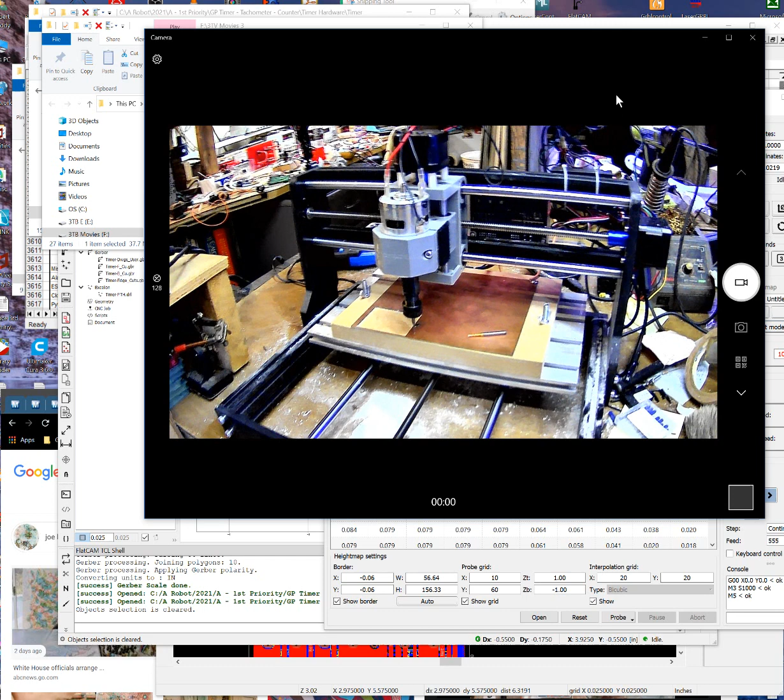Alright, I'm going to be making a double-sided circuit board with a 3018 Pro. There are a lot of variations of these machines out there, and this video will pretty much apply to all of them, like SainSmart makes one, etc. They call them sometimes something different, but any machine that basically looks like this is essentially a 3018, and if it uses Candle, which is the included software, that's what I'm going to be using for CNC milling.

I'm also going to be using Flatcam, which this is a pretty recent version, but it's actually about a year old. This is July of 2021, by the way. And my circuit board program is KiCad. So all this stuff is free software.

This won't be so much involved in KiCad because the board is pretty much already designed. I did just have to shrink it in length to fit on my little board here because it's only like a little over 6 inch by 6 inch. And you can see I've already actually routed one circuit board out of it, which is actually this board, and it's actually quite impressive what kind of resolution this thing has.

Now this is a little webcam I'm using here, so it's not the greatest, but it's the only way I can do this really kind of interactively without cutting it together, because I hate having to render videos that I stitch together. So I'm going to try to do this as a single continuous shot.

But yeah, this actually came out of this little area here, as you can see. And that's the little solder tab, which I'll explain later.

Now there's a couple of things that, and this is going to be a lengthy video, I can't help it, so there's not much I can do to kind of trim it down. I like filling in the details because the devil's in the details. But I'll explain my setup.

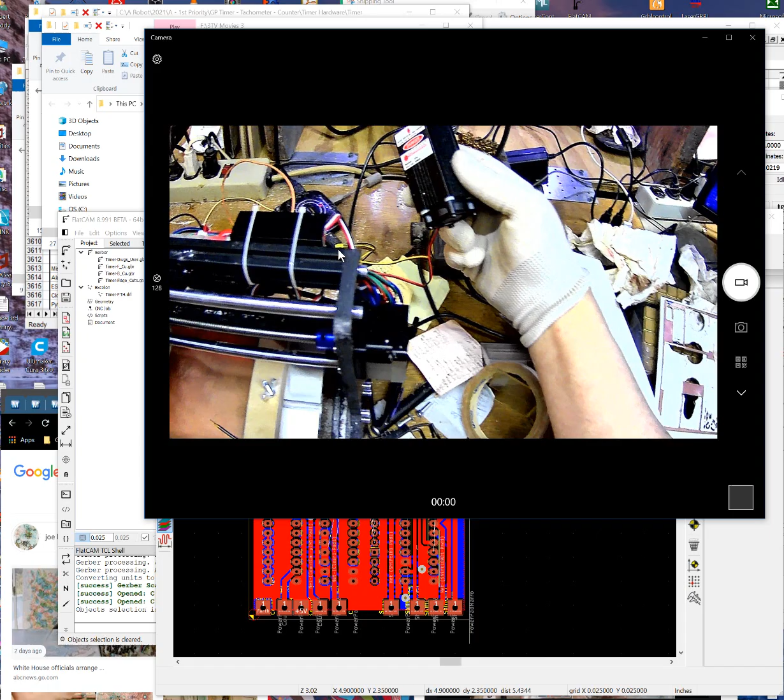Firstly, this is just a particle board that I bought from Home Depot. It's like 3/4 inch thick or something like that, just the cheapest stuff, nothing special about it. And you can see that I took a couple of bolts that actually came with this machine, and this machine came with a laser too for like $189 or something I bought off eBay. It's a 5-watt laser, and it works pretty well too, surprisingly.

You can see some laser experiments I did there, and this is white PVC, and it actually cut through it no problem. I would have thought white material would have reflected, but it would cut through white paper too. That laser is substantial. I was really shocked that it didn't reflect.

But this stuff right here, by the way, is expanded PVC, and I'll explain that in a second, what its role is. It's not going to play a role in this video, but boy, I highly advise you use this in the future, because I've used it in the past.

I'm not using it here because I'm about to take this jig, because this table is like a 7 inch by 12 inch table, and you can actually use 100% of it for routing, which is really surprising because usually you don't get that on a lot of these machines. Usually you can't use the whole table footprint for machining, but here you can.

So yeah, I'm going to cut a piece of this that's 7 by 12, and instead of the bolt being like this, I'm going to actually counter bore a hole about halfway through this material so that I stick the bolt in like this, and it'll go through a hole in the table itself. So underneath it I'll put a washer and a nut, and that'll hold it really, really tight to that position.

Same with this - I used to be in the sign industry, that's why I know this stuff. But it's really good stuff, and I've used this for CNC work for years because you can just use it over and over again. And this tape is so good, and this is what's so awesome about it.

If you want to use it for other things, like I stuck a light inside my freezer while it was running, and this stuff sticks just fine to a frozen surface. It works in freezing conditions. Most tape doesn't - most tape craps out on you below freezing. But that was well below freezing, like 20 below in there, and it still works just fine, and that light's still mounted in there to this day. It's really excellent stuff.

It's good for not just this, but a lot of stuff. And you can see it was used here - it's very strong, but you can still remove it. This is tacked down with 4 stripes of this going from left to right across here. There's 4 of them, and that's more than enough to hold this in place. I don't have any mechanical fasteners at all.

By the way, too, when I make up this platform here bigger and countersink it, you only need 2 fasteners, if you follow what I'm talking about. If you didn't trust the bolts alone, you could use a couple of strips of this under it and it would be fine, but there's really no need for it. The bolts alone will hold it, and you only need 2 of them, so you don't need to go stick 4 of them.

That does no good whatsoever. I mean, I don't advise you waste it, and I don't advise you put any more holes in this machine tabletop than necessary, in case you want to use it for something else.

Because you can buy what they call T-slot bolts for this, if you wanted to machine other things like do 3D sculpting or something, and you may want to get a 3D T-slot bolt set. You can probably find one on Amazon for this, and they're the proper thing to use. I've got one for some of my other CNC equipment, like that's a Sherline type mill right over there.

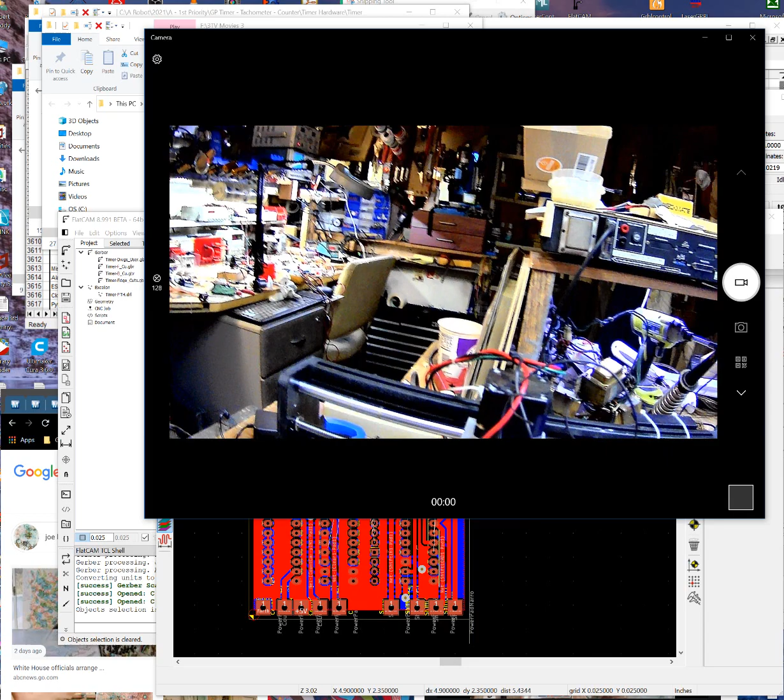Anyway, I have some - it's got a T-slot table on it just like this. My K2 does too. So I mean, you can use the right size bolts from Home Depot, but some of those sets are actually a much better choice quite often. It's up to you, it just depends on your budget.

You can take like an oversized bolt if you want, and if you got a bench grinder, you can actually grind it flat on 2 sides and grind it just the right size so it'll actually fit in there like a T-slot. That's another option - I've tried, I've done that before.

But like I said, you can see how I have this set up. My first set was single-sided boards, and that's what I use this for. It just had some of this tape at the bare corners, all 4 corners, and nothing in the middle.

That was a big mistake, especially with all these damn holes I have in it. I have these holes because my K2 had a vacuum hold-down table that I built, which used to hold my circuit boards down, hooked to a vacuum cleaner. It worked well, but anyway, it gets in the way here.

I would have been better off putting tape all over it. That's why I had to put some pieces here, because I used the crap out of it. I don't like wasting copper clad—I've got a ton of it, but I don't like wasting things. That's why I like doing things in big panels.

If you're interested, I lubricate my bearings with 3-in-1 oil. Some people say it's not a good idea, but it's worked for me on my K2 for years. You just basically rub some over your slides and your lead screw, top and bottom, and truck the table back and forth and the head back and forth to fully lubricate it. Put as much as you can, and do it every now and then. It doesn't hurt to wipe some of the debris off with a rag every now and then.

At any rate, this board I did out of this—what I did, again to save you the suspense, was the very first thing I did was really do a surface map on it, a height map.

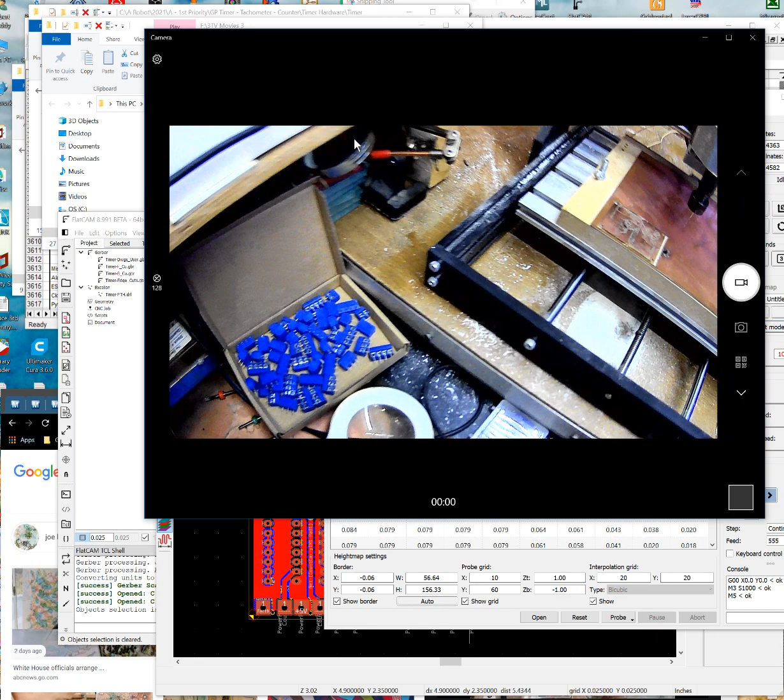Then I went in and drilled 2 reference holes. That's all you need, is 2 reference holes. And I used a... where'd that bit go? Damn it. Anyway, I used like a 42 mil drill bit.

I had a bunch of these I bought a long time ago from like Drill Bit City or someplace. I don't know if they're still around, but they had good prices on things like that.

Found them on, I don't know, Yahoo or someplace. But at any rate, you just need like 2 holes in it for reference, right?

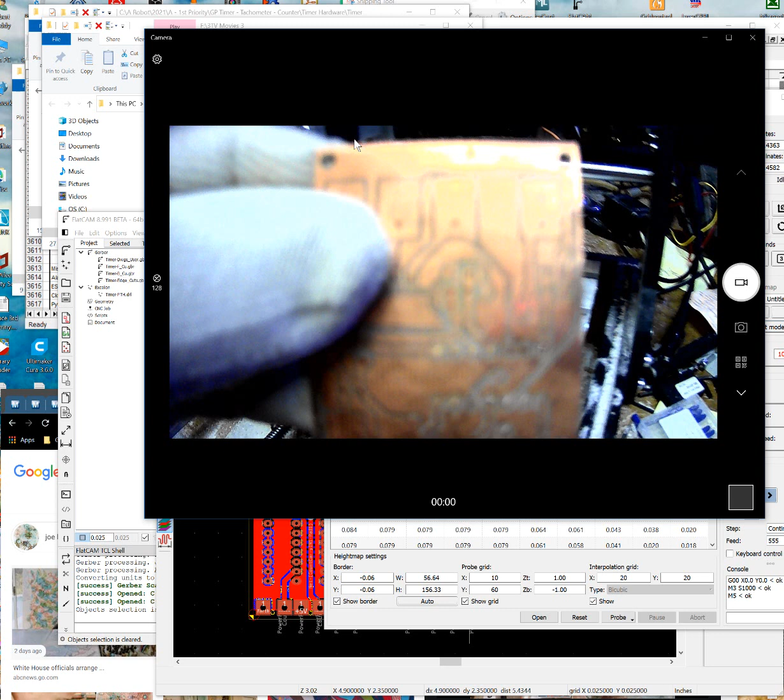And that hole right there is one of them. Then on the exact same place on the other side is one too. So basically, if you have a hole like that—since I got it on the left and right side—what you got to do is mirror your bottom layer left and right, so you flip it like this. As long as you do that, those holes are going to be in the exact same spot if they're on the geometry in the exact same place.

Now, if you wanted to do it up and down, which is what we're going to do with this board, you would want to flip it over that way instead. But you'll see what I'm talking about. It just depends on where you want to put your alignment holes. They don't have to be in the exact center—you can see that these holes are not in the exact center. They just have to be the same distance from, say, the top edge.

If they're both the same distance from the top edge, it'll flip and be in exactly the right place. And once you're done routing your board, the first thing you do is drill those 2 holes, and then you do the route of the pattern with your V-score routers.

For this, I actually used this 45-degree tip right here. But on the board we're about to do, I'll use this 3-sided triangular cutter, what they call it.

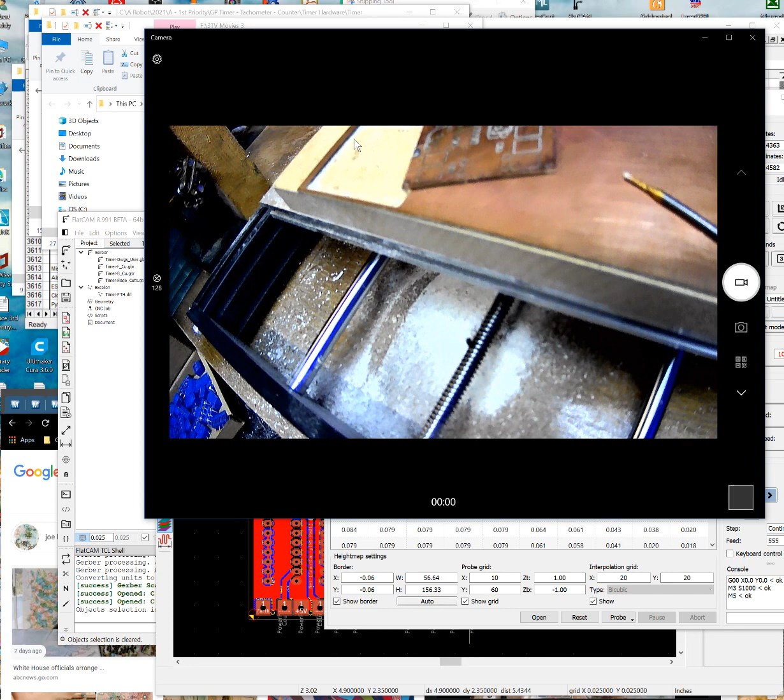Don't use those cheaper ones that are cut in half, because they break all the time. I've got a ton of them, but they break constantly. Let me see if any of them are unsheathed... yeah, here we go. These suckers right here, they really suck. You see how they're cut in half? They're not triangular, the bit is, but it's like somebody took a grinder and literally cut the thing in half. So you get kind of a conical point on one side, but it's just flat on the back side, a single flat going across here.

I wish this thing zoomed in better, but it's a webcam. Yeah, these suck, they break all the time, the tips break. But so far, these little triangular tips have worked great.

But again, for this circuit board that I'm going to do, I'm probably going to use like a 30-degree tip, because the resolution on it is going to be... I'm going to be really surprised if I can pull this board off. I'm not sure, I've never tried it before, because this is only the first double-sided board I've actually routed on a machine like this.

I've never actually done this before. I've created tons of single-sided boards. I've done lots of double-sided boards using an etching process back in the mid-90s, making literally thousands of boards that way, but not double-sided on a router like this, though plenty of double-sided ones using etching.

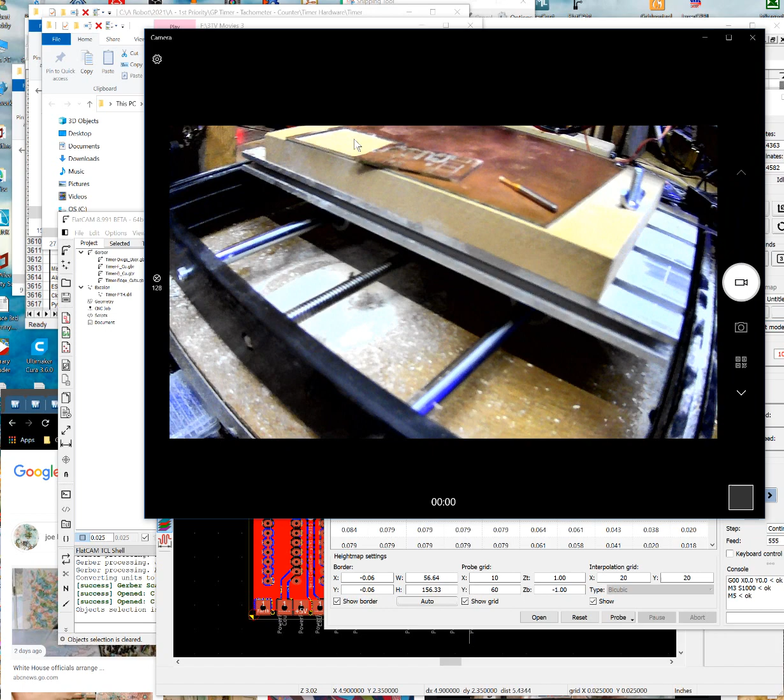Use the right drill bit size, and grab yourself a couple of thumbtacks. So you've got your tape on the bottom of it, right? So if the tape would be on this side, you take those little holes, stick your thumbtacks in, and you want them tight but still able to slide in. You stick them all the way in, and then unpeel the backing off your tape.

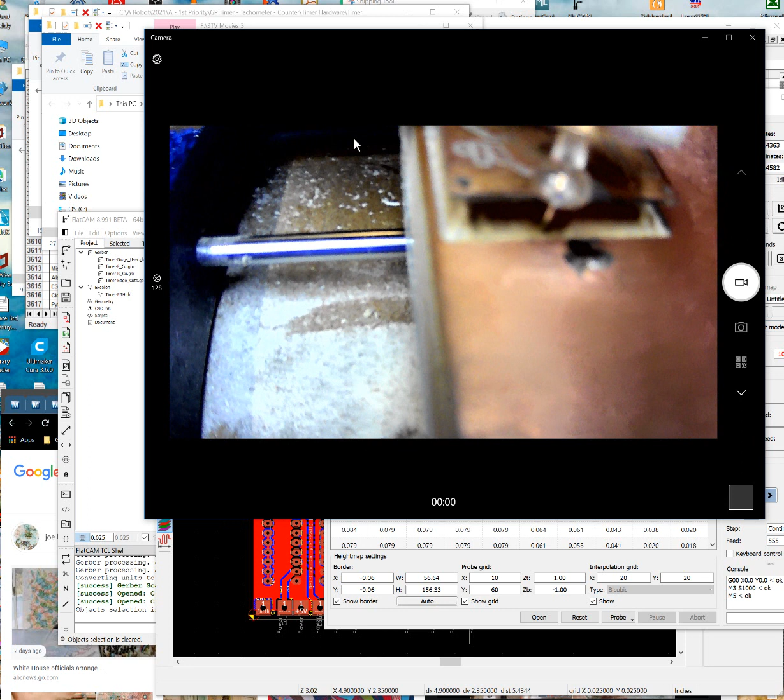Then you go in and stick it, looking for those alignment holes. And voila, once you found them, you press it down, using these tacks to make sure it's in place. Press the tacks down, press the board down, flatten the board so the tape sticks, and then remove the tacks. The tape holds it. I don't have tape on it here, but the tape will hold it exactly where it needs to be.

Now, before you do that, though, you see this little solder joint here? Solder yourself a little wire before you go through that process, and you probably should put it somewhere different than I did here, like over here or over here, where it's not going to be in the way of a future board you may want to route, because that stuff's hard to remove, and you don't want your router going through it. You can try with solder wick or whatever, but still, if you don't have that handy, my advice is just put it out of the way.

But you do that because you'll have to height map it again once you flip it over. You'll have to run a whole height map on it so that you get everything level to the new board, because this is going to have a different height, so you're going to have to rerun it.

And there's a couple of tricks to doing this, and one is that, unlike the mistake I made with this particular board, don't make the corner your zero reference on the exact corner of the board. Otherwise, chances are your height map is going to be really hard to make, because it's going to want to walk off the edges of this thing. Inset it by about 1 millimeter. It's 50 mil, about 50 mil both directions. That's what I use. That's enough to keep it confined, but don't make your pattern go to the edges.

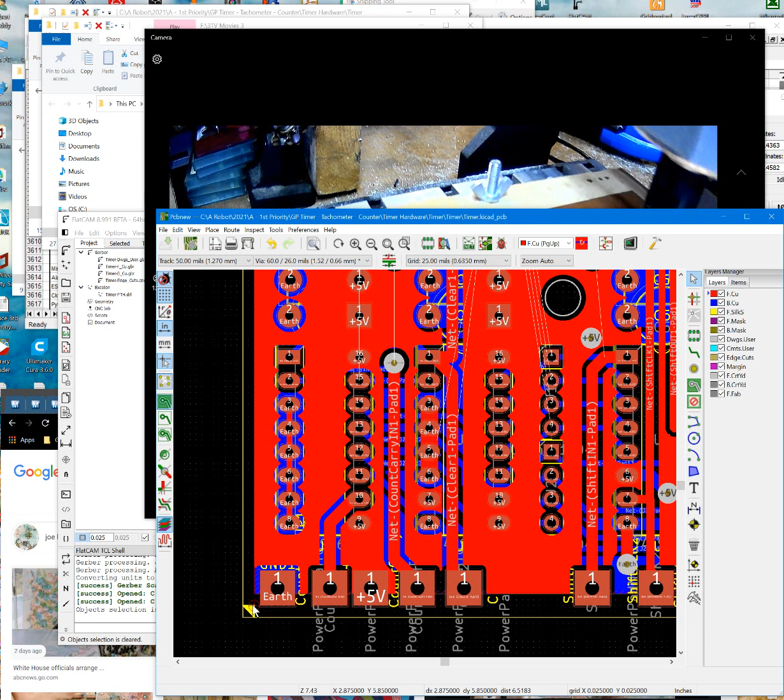But basically, here is where I'm putting my reference anchor. So I made this little silk screen triangle here so that I can mount it to the corner of that. So you see, that's where my reference is, on the corner of that little silk screen deal. That should be your home. That way it'll height map okay, and you won't walk off into the gutter. But definitely don't forget to solder that wire, otherwise your height map is not going to work out so well if you don't have that little solder joint there.

Now, a little word about how I set my height mapping up, which I haven't seen anybody else do on the internet. On every board, on the top surface, you solder a wire there, right? You only need to solder one on the top surface of your blank board. Okay, and that goes into the A pin. You can see this on the internet; there's plenty of articles about how to set this up, including on SainSmart. But it goes into the A pin there, but then I have, damn this thing.

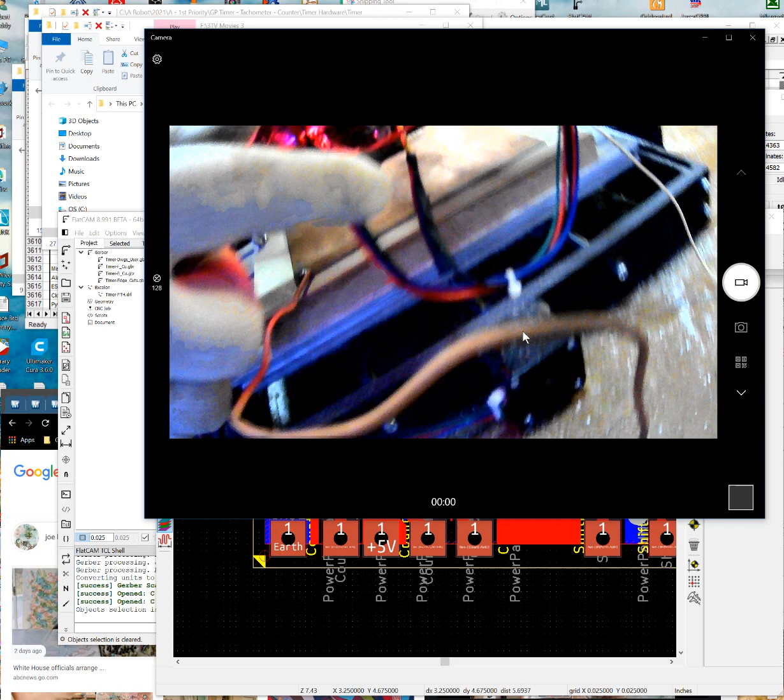Anyway, I have this going into a European barrier block here that I cut in half, cut out to be a 4x4. Then I have an alligator clip coming out of that, going over to this wire here. Now the other wire coming out of that is this black wire. It is hard operating a camera like this, because this is backwards and everything. But at any rate, that's that black wire, and I have it going over here, guys.

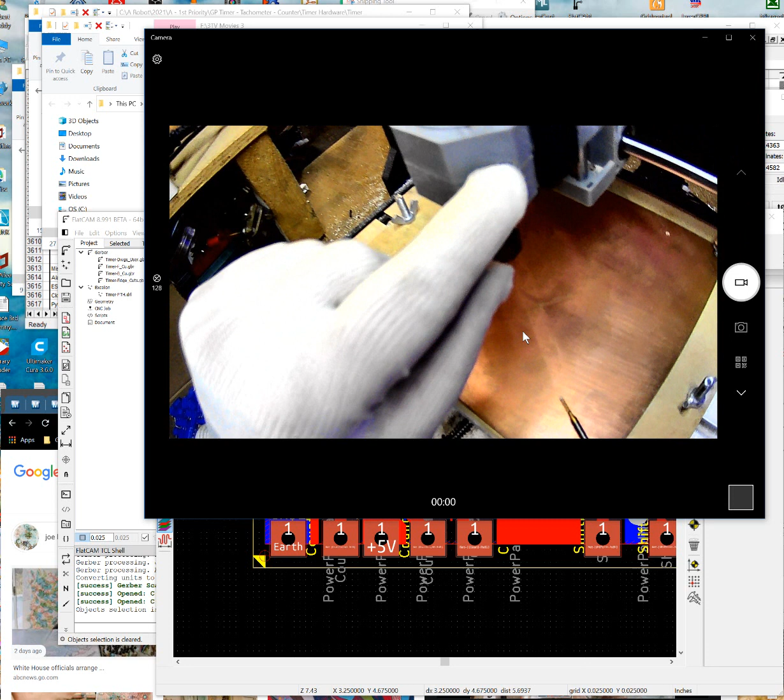Almost everybody I've seen uses alligator clips, and they clip it to the spindle. You don't need to do that. I have a wire here soldered to a piece of nickel, and anything conductive will work, and that's just pressed down in there, and then I just tighten this screw down on it. So this isn't actually soldered to the motor, it's just soldered to a piece of metal, any metal that'll take solder, copper, whatever. As long as it's flat, you don't want to interfere too much with your motor being gripped.

But anyway, once you got it in there, just tighten it up, and Bob's your uncle. You can leave it like that. You don't have to disconnect it. And believe it or not, this body is always in contact with the spindle, always. And you can always test it if you just freshly set it up. I tested it. I'll take one of the wrenches that came with it and just do that. Here, I'll show you.

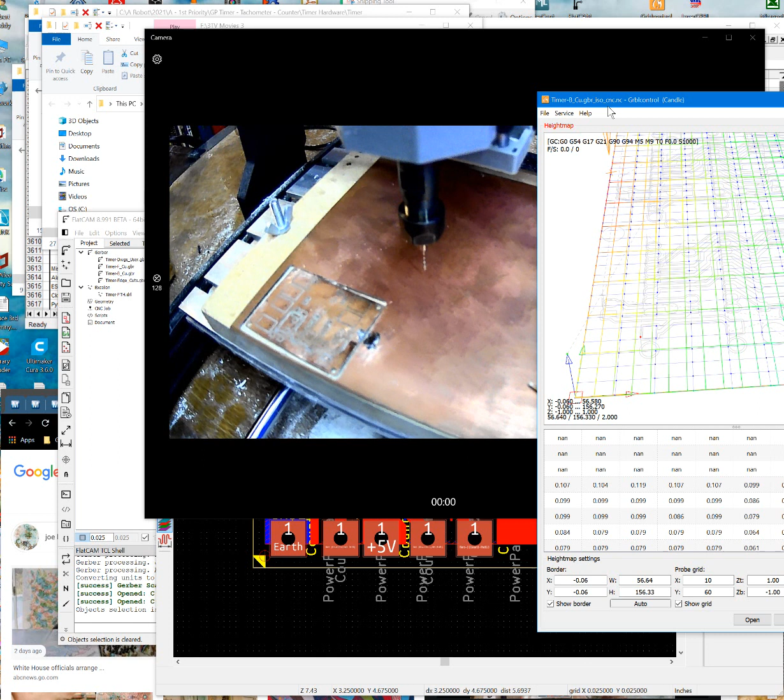I figured it would act like a limit stop, but it doesn't. It's actually a totally separate circuit, so you can leave that connected all the time. It does not interfere with the operation of the machine. So there's no reason to keep connecting and disconnecting it all the time, because you will break bits like crazy by either forgetting to disconnect it or...

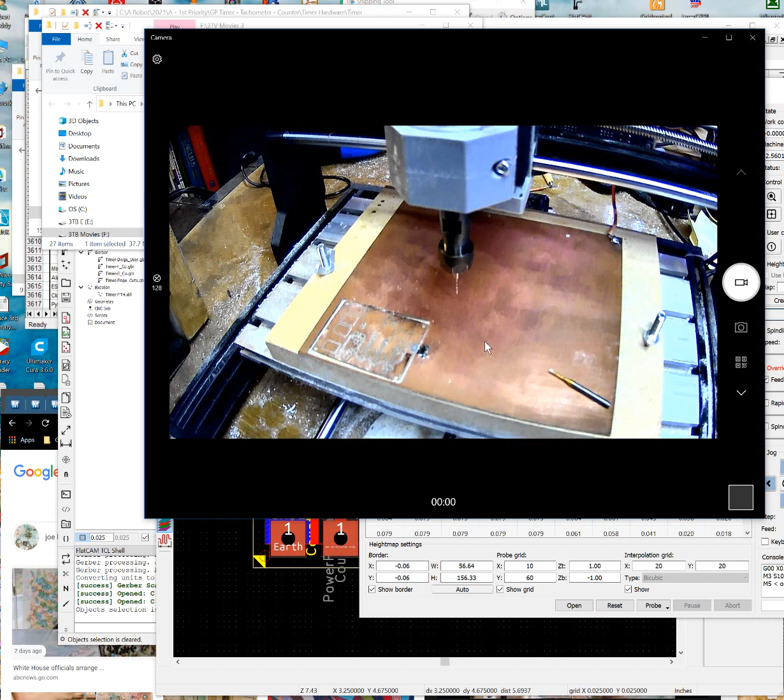Anyway, the fact of the matter is that it works, and you can just leave it like that, because like I said, you'll either break tips, or more often than not, you'll end up almost starting a fire by forgetting to take the damn clip off of that thing. So it's just better not to do it that way. Just leave it permanently connected. There's no need to do it.

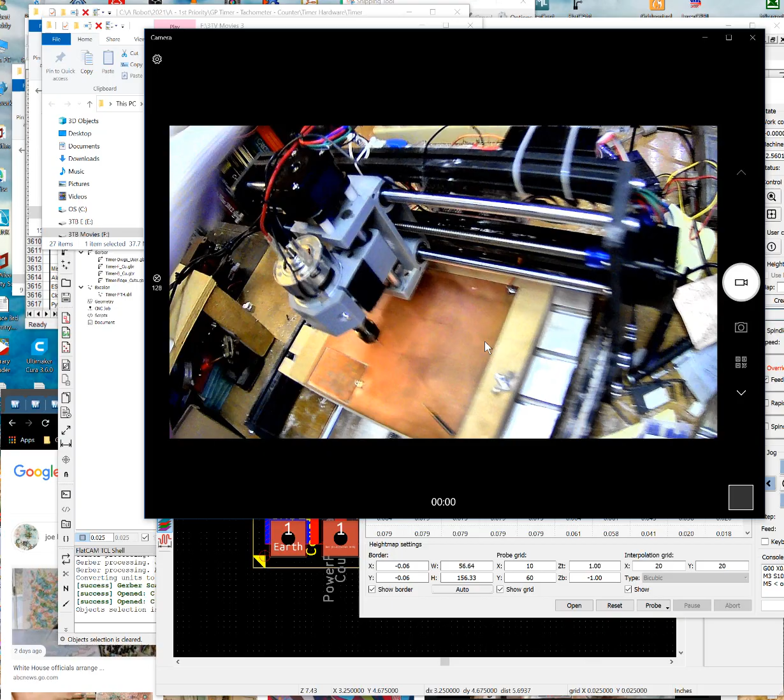I wish I could make these wires better here. On my ShopBot, I've got a band that's in an arc of flexible plastic, and the umbilicals, all the wires and everything, I run along that. That's what I'd like to see, something like that going here, but I haven't got around to looking for that yet. But anyway, you need to wire tie your wires to it.

And a note too, when running these machines, I tend to run them pretty slow. Again, you can certainly experiment with your own equipment to get it up as fast as possible, but this is not a very high-speed spindle. These circuit board drills and circuit board tools are typically made to operate between 10 and 20,000 RPM. That's what they are actually used at in industry.

They're really high speed. This is running at, I don't know, I haven't put a tachometer on it yet, but maybe 1,000 RPM or so. You can tell just by how it sounds that it's not very high power. But if you actually look into these motors, this is basically the same motor they get out of one of those battery powered 18-volt routers, and of course they're powering this off at 12 volts.

But you could literally, if you didn't care if the machine controlled the motor, just wire this up to an external variable power supply. It better be a lot of amps, because these motors tend to draw a lot of current. Have something that'll go up to maybe 15 to 18 volts, but I don't think I'd run it that high, because these motors, being from power tools, the bearings and so forth in them aren't really built to run for extended periods of time, like an hour on end at a high speed.

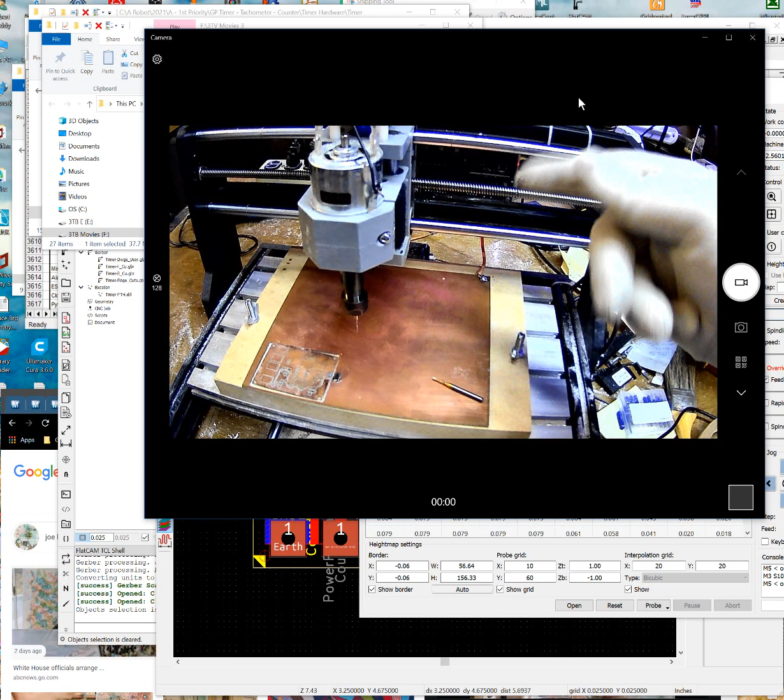So that's one of the reasons they have it tuned down. The other reason is just because they're cheap and they don't want to have to provide a bigger power supply, because higher voltage would mean more current and a much bigger power supply. This really should have at least 5 or 6 amps. This, I think, is only maybe a 2 or 3 amp power supply. I forgot. But at any rate, it should have at least 5 or 6 amps, preferably 8 or 10 available for stall situations, if you're going to run it at a higher voltage.

But it could be done, like if you're going to drill holes and wanted to do it really fast. If this thing went at high speed, it could drill all these holes within a few minutes. You could run this at a much higher speed for a few minutes without it getting too carried away, although I still don't think I'd run it up to the full speed. A motor like this can typically go up to about 5,000 RPM, and you'd be way better off with that with some of these drills. But still, I've had okay luck at this speed.

Another thing you could do is build a FET-based amplifier, because this is just PWM, so you could have that driving a FET amplifier. Then your separate power supply would be modulated by that, which goes to the motor. Then you still have both speed control and on and off control, like you do currently. So that's another way of doing it if you wanted to dink with it. But you should probably just buy a higher speed spindle, because they have them for like $60.

Anyway, that's enough said about that. But this is the basic process of how you go about making a double-sided board here.

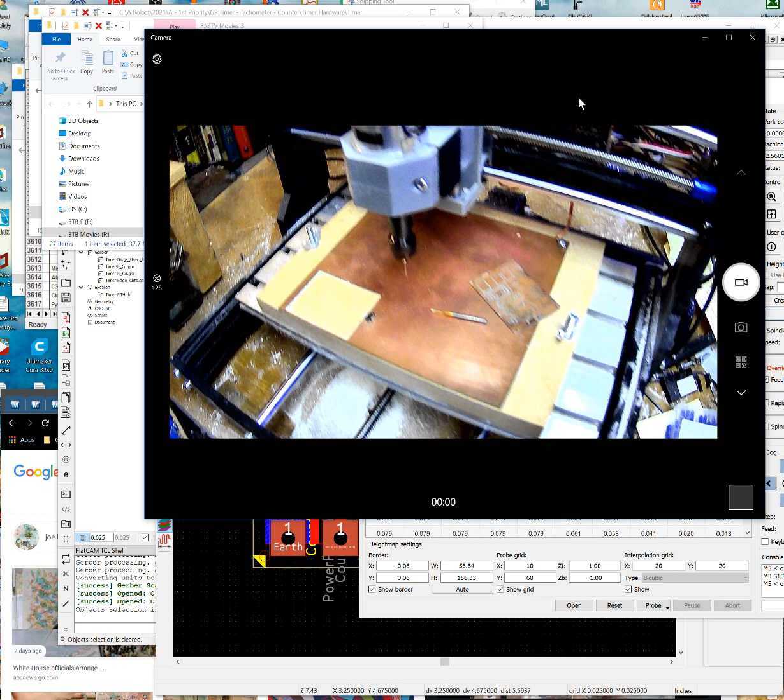So I'll see if I can think of anything else for a minute before we get started. And I guess I ought to say that I have made thousands of circuit boards myself. I've been doing this, like I said, ever since the early 90s. Back then I was using chemical etch with ferric chloride, and came up with a lot of contraptions doing that. I was actually in a small-scale business doing that for a little while.

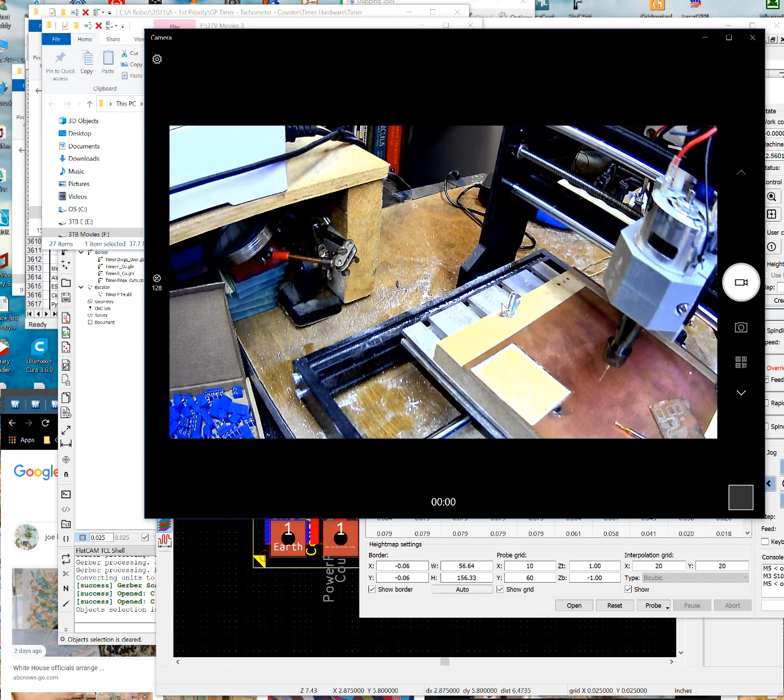That's what I'm saying. I've made lots of circuit boards using lots of different techniques, including the iron-on technique with the paper, which I actually have my own version of, which worked quite well, but it's not as elaborate as what people are doing these days. But I'm not quite sure if that technique really works with most laser printers anymore, because I don't know if the laser printers seem to put enough ink or something. Something seems to have changed, but I'm not sure if the toner is the same or whatever.

But still, doing it with CNC has certainly been a really great way to go. I've made some pretty large circuit boards doing that. Let me see if you can see this without unplugging the camera. I don't know if you see that right there, but that's actually a digital sign, and those panels I made on my K2, and those are like 12-inch by 6 or 7-inch wide panels, and there are like 4 of them in there. So that's a great example.

Again, my K2 over there, which you can hardly see, it's buried because it's on the other side of that monitor over there behind those wire spools. But at any rate, that is a machine that'll do 12-inch by 12-inch circuit boards, and I had a vacuum hold down for it that I used to use, which is why these things had holes in them. Those are for vacuum hold down holes. You see, there's one of the actual full-size pieces I used to use for that machine.

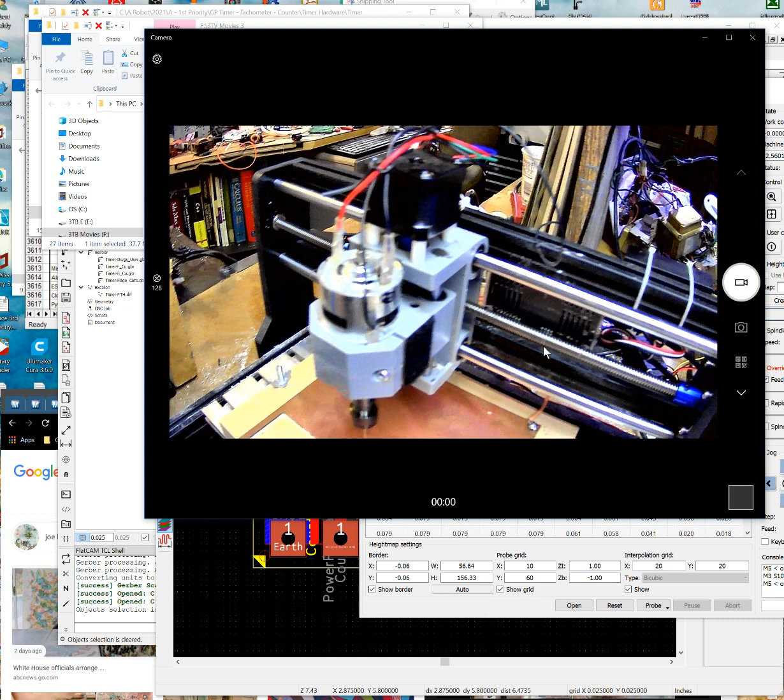But I don't use that anymore. I'm trying to use this for circuit boards because it's so much more precise because of that height mapping it can do. Because I couldn't make circuit boards like this on my K2. I could with traditional cylindrical routers perhaps, and if it was small like this, I could. But if it was large, I couldn't do it. But this will height map, and it's mostly a software thing. In theory, you can make the K2 do that, but I'd have to write my own software for it. So I'd rather not waste my time on that.

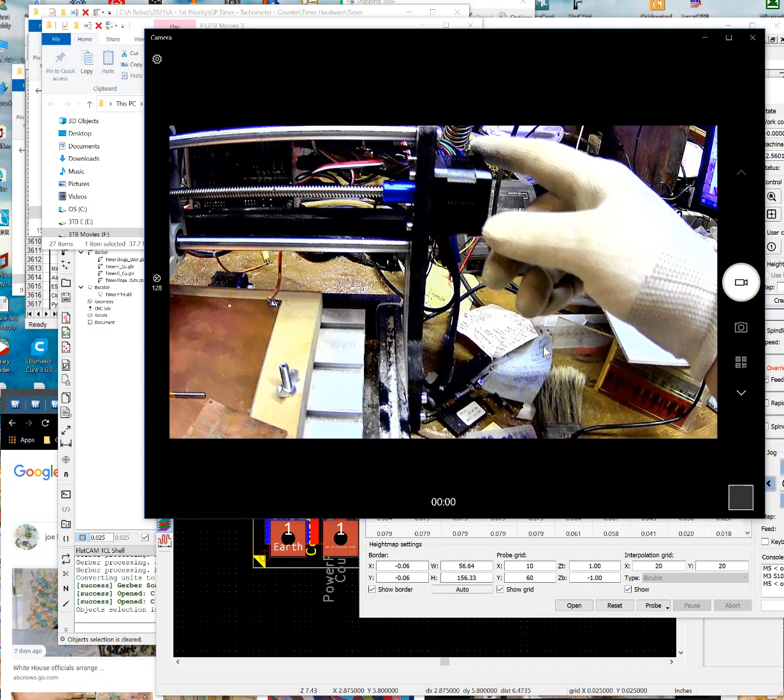So I'm just going to use my K2, which is a much more powerful machine than this, for more serious work like routing aluminum and stuff. It's powerful enough to do that. This, with these little 30-ounce or so stepper motors, I don't know if I'd have a lot of faith in that. In the spindle in particular. Like I said, it's stronger if you want to run it at a higher level, but it's still not built for high-speed, long-term operation. Even though you can get more oomph out of it than this, I guarantee you. I don't know that I'd want to route aluminum, but I have seen people do it, apparently with stock motors but an updated spindle.

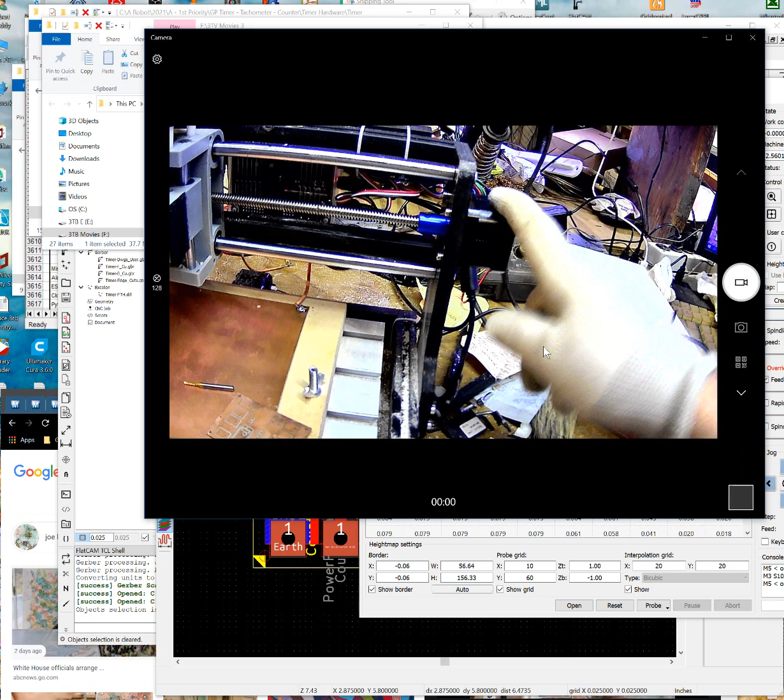But really, these motors are responsible for the feed force, and if you don't have a lot of force here, you could lose steps pretty easily. You'd be amazed how little force these things can actually apply. Being such small motors, it does make sense to have a more powerful series of steppers, but they're NEMA 17s. You could upgrade them, but I don't know that your controller would be able to power them or not because it's got built-in little stepper drivers. But at any rate, if there's anything more, we'll mention it as we go.

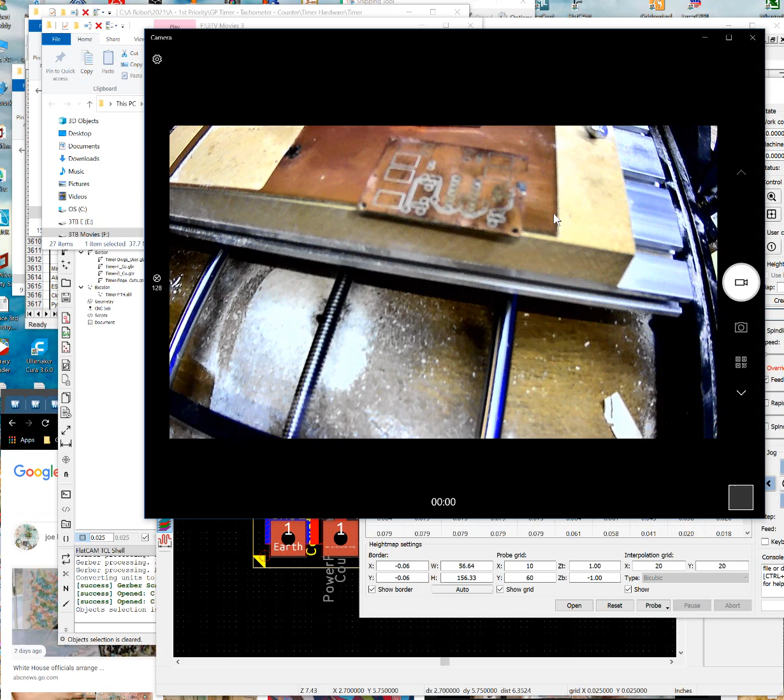Oh, and one more thing, if you're wondering why I'm not using the expanded PVC on this, and I'm just drilling directly into the backing, which I never do, it's because, like I said, I'm about ready to dismantle this thing. I'm not going to use it again, so I don't care if there's a bunch of holes in it, and I don't want to waste any more of that than necessary, and I don't have a good piece to fit this, so I don't want to butcher one of my other pieces just for this when I'm not going to use it anymore. So anyway.

If I were going to use it, I would put some of that hem tape on it, about four stripes across the back of it, and put it down into our baseboard here. Then I'd put tape on the back of this just like I did, and tape it to that, to the expanded PVC. So that's how you do it.

You can peel it off again because that tape is permanent technically, but it's still pliable, so you can still peel it off even if it's been a month or more. That's why I like that tape so much.

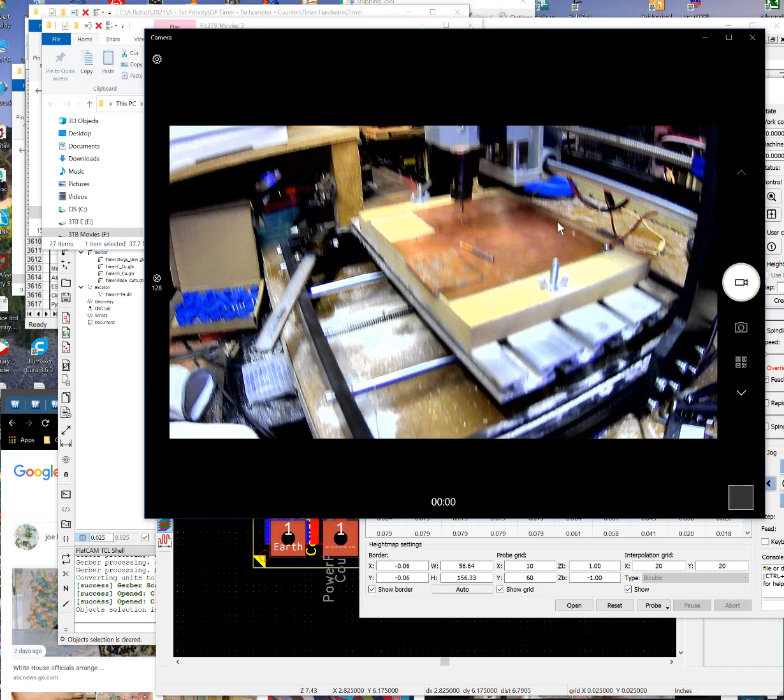Before we really get going here, I wanted to cover some of the stuff that you should probably have if you're going to do this kind of thing.

Have yourself a set of these, and of course you're going to want a set of router bits. Here's a set I bought again off Amazon for like $10 or so, which has a lot of different sizes. Typically I've been using the 1/16 inch router bit, 0.062 or so, but you can use any one you want. That's just been my preference.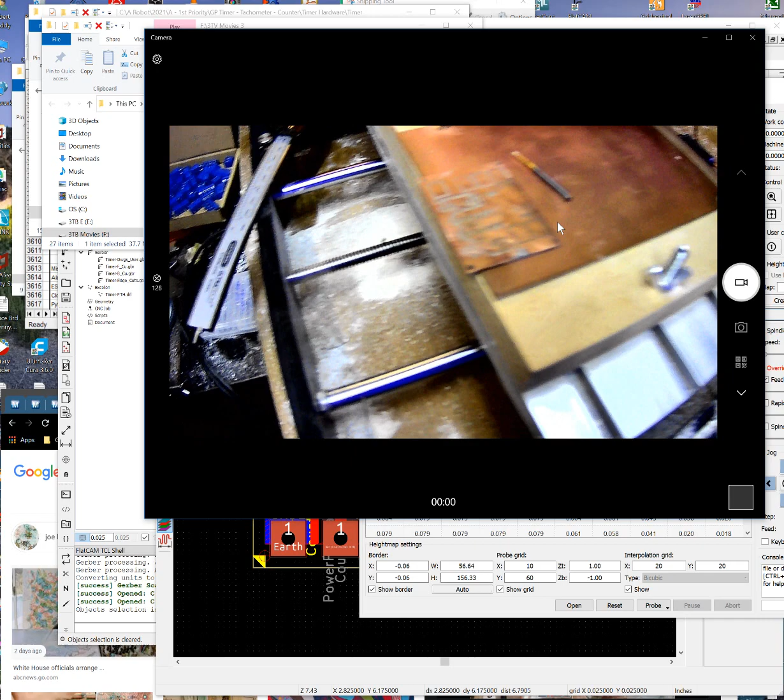Because it has a narrower kerf, so you get more use out of your board. I don't like to waste copper clad, I just don't. That's why I don't do it like other people do it.

They'll cut the board, the copper clad, to roughly the size, and then they only got one loaded up. But this way I can actually do several of them without having to change out the panel, so it works a lot more efficiently. You don't have to keep messing with your main board and backing and your waste board all the time.

You should have a good pair of calipers. This is inches and millimeter digital calipers. I bought this, I think, for 18 bucks from Amazon Warehouse, so I found a good deal on it. These are normally 30 bucks, so nice little calipers, they work really well.

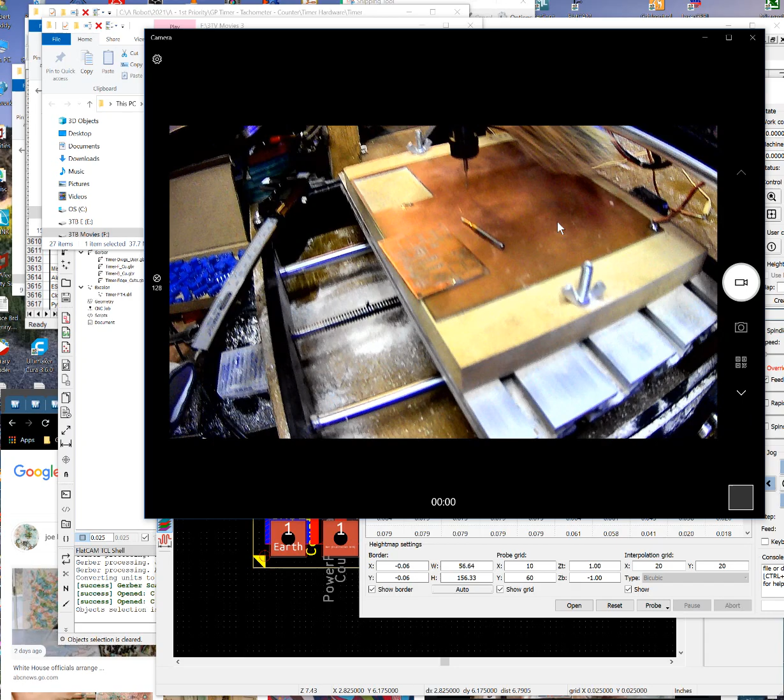You're definitely going to want a little paintbrush so you can dust it off as you go, because it doesn't matter if you get it close to the tip when it's turning, etc.

That works great. And then oftentimes I'll use a lighted magnifier glass like this, which has basically visible light and also UV, which is interesting. You can see what it's doing to the traces there. As it turns out, when you're routing with FR4 or whatnot, boy, that backing really shows up through the light really well, so you can see if your traces have got any garbage in them really easily.

I was really surprised how well this worked. That was quite a discovery there. I only just recently discovered that with this thing, but man, it fluoresces. The material I use fluoresces.

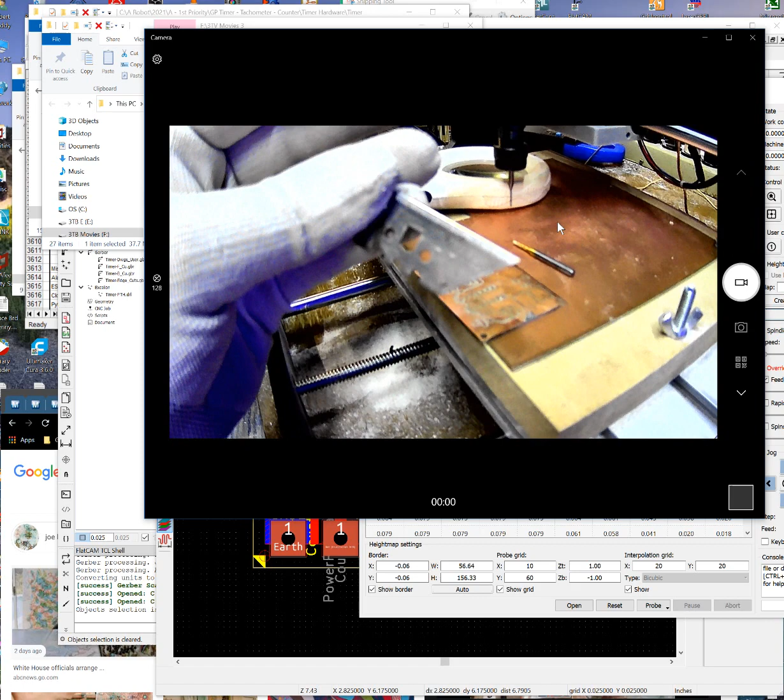So you can tell if you've got any little copper slivers or anything in there that you need to dig out. And you should have some dental picks, which I don't really have one lying around. You can use little razor blade tips like this, for utility knives. Those work really well to try to scrape stuff out of there underneath a magnifying glass.

It's a really good idea to have yourself one of those mag lamps, like I got over there, to look at these under too, especially when you're doing that, so you can do it hands-free, because that's usually a two-handed job. You don't want to turn it into a three-handed job like you would with this. Or have something that can hold the board independently while you scrape it, but you have to apply force. And of course, get yourself a good collection of drill bits wherever you can find them.

A lot of these I bought like 20 years ago at a place called Drill Bit City. They were a good price, but you can find some pretty good stuff off Amazon too.

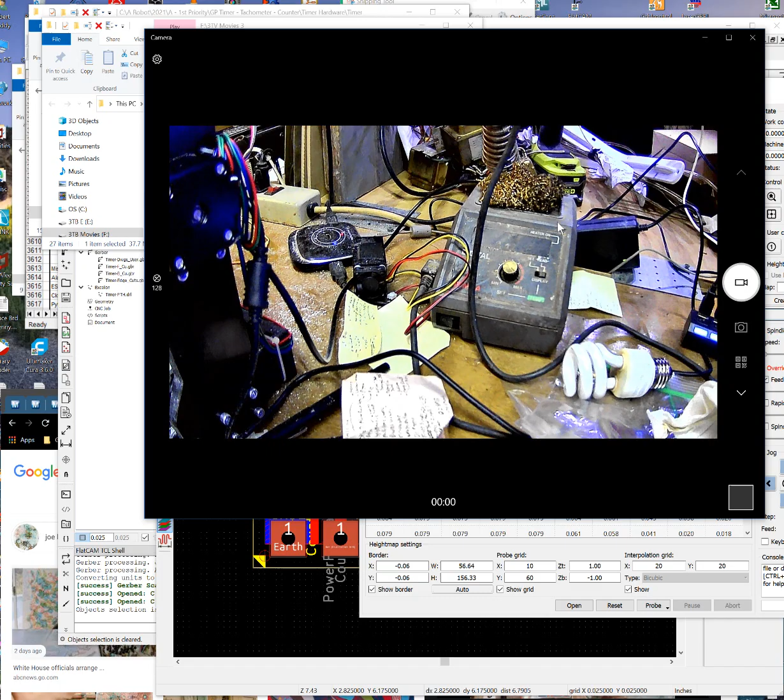I got myself one of these little things which work all right - little magnifier glasses - and definitely a soldering iron of some kind is a good idea to have, and certainly miscellaneous tools like screwdrivers and stuff. You want to have some basic tools like that. It doesn't have to be lighted, but it helps a lot.

Especially if you're trying to route it, because a lot of times I'll try to study the route, like when I'm doing V-score routing, as it goes. I'll brush the chips off with my little brush and try to make sure that it's actually scoring fully into the board, as opposed to just scratching the surface of the copper, which you run into sometimes.

That's at least a basic minimal tool set I'd advise you to have for doing this kind of stuff. And Scotch-Brite pads, like that green one lying over there, is a good idea.

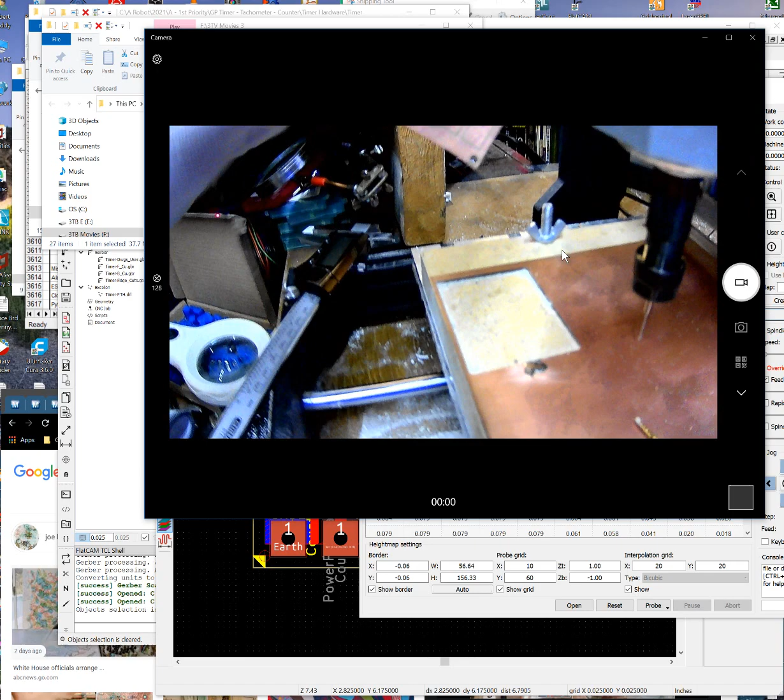But what I found is that the best way to actually clean a board - because you'll have to do that - that's the other thing I forgot to mention: when you're done with the first side of the board, the top side, and you're ready to flip it, you should clean off the top side before you put tape on it, because you want to make sure you remove any burrs.

The best way to do that is actually with a bastard file, just a flat file. As it turns out, this is actually one of the best ways I've ever found to clean circuit boards. If it's already routed, you just do it. You've got to be a little persistent, but it's actually better than Scotch-Brite or sandpaper. If you have a bastard file, you can make this nice and shiny, really, really good solderable surfaces.

By the way, if you're doing soldering - I don't know if you can see that, but that's actually exceptionally shiny with a very small amount of work. It's a really, really good way of cleaning not only the burrs off your board, but also getting all the smudges and fingerprints and anything else you may have on it off.

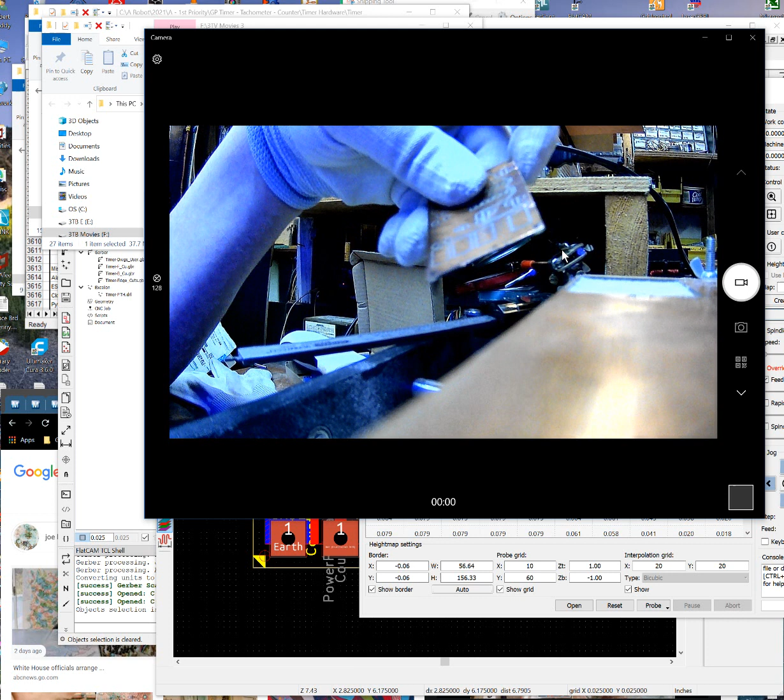When you're soldering these things, you might want to get some liquid flux. No-clean liquid solder flux is what you'd like to have - I'm sure you can get that off Amazon too. Just have a little syringe, like a needle syringe, you can apply it so you can get it right on the pads. Because these things will solder a hell of a lot better if you do that.

If you're worried about solder bridges and stuff - which I'm still really worried about with things like this and the board we're about to do, given the fact that I've got a lot of traces routed between a lot of the pins on the board we're about to do, not this one - I'm still really nervous about whether it'll actually be solderable because of all the bridges.

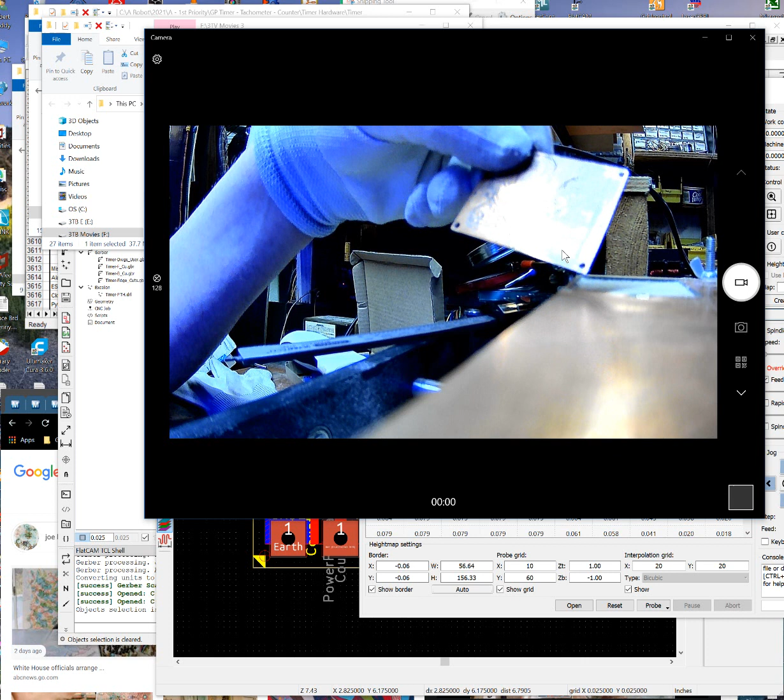But you can actually buy solder mask on Amazon. They have two varieties: one's kind of an iron-on stuff, and the other is this liquid stuff. And these German guys make a good video about how to do that.

I don't know if I have the video up yet still or not, but today I'm gonna... yeah, it's these guys, that's DIY Tech Brothers.

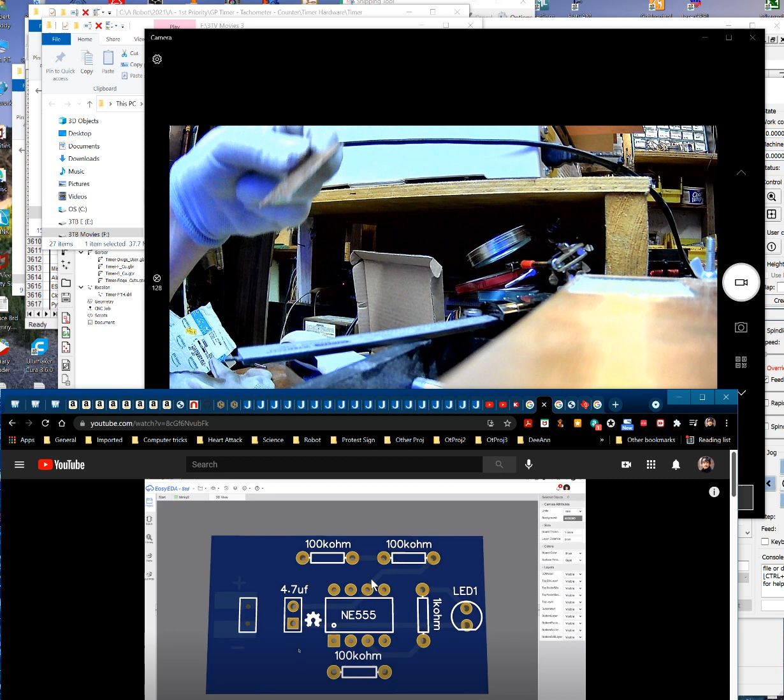They have some pretty good videos about going in and doing things like applying solder mask, and they have their own videos on double-sided boards, but they do it in a more traditional way, as opposed to the way I'm doing it. You might check their site out if you're interested in some of that solder mask.

But you can buy that off Amazon too, although the syringes don't come with a plunger on them, the ones on Amazon. I don't know how they get around that, but it's available there, though I've never tried it.

The last time I used solder mask, I used LPI, which was actually the professional grade stuff they actually used. You'd silk screen it on, then do a photo exposure pass, which you could do in sunlight or whatever. It's doable, then you use a chemical to remove it, and that isolates your pads, and it works really well.

You got to be careful if you ever find any of that stuff, because it may look removed but not actually be removed, and then you can't solder to your pads. So you got to make sure it's not overexposed or anything.

But at any rate, I digress. Let's get back into the video because we got to get this FlatCAM stuff done. I've already loaded up the layers on it, as you can see here, but I could just start a new project for you.

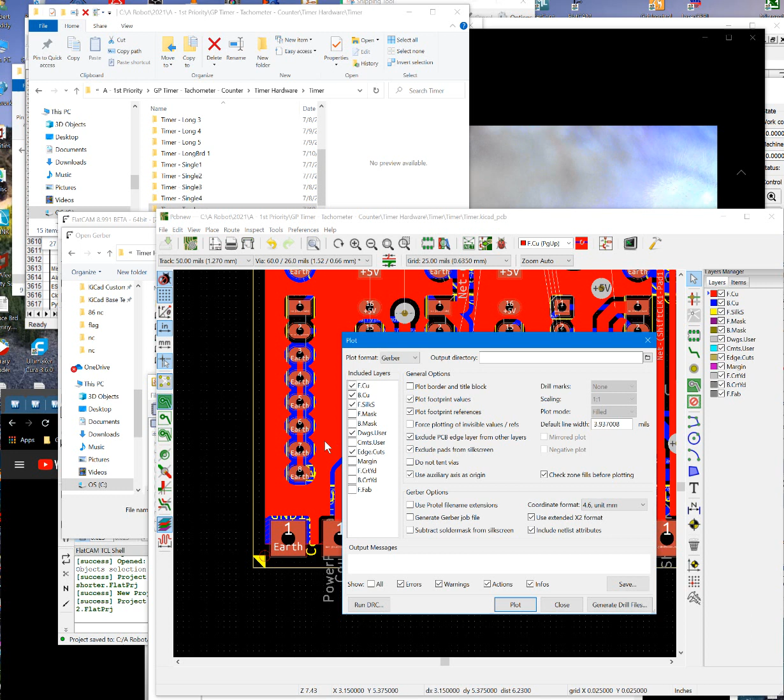At any rate, these are the layers I typically convert to Gerber, and for this I have some mounting holes, and I put it on the drawings layer instead of the edge cuts layer. I actually have them on the edge cuts layer in KiCad too, just so the fills will route around them.

But this right here is actually, you know, see, that's the edge cuts layer, alright, but this is the drawings layer, so I actually put these separately on the drawings layer, so I can use those with FlatCAM, because when you're doing the edge cuts layer, it won't recognize internal features like RhinoCAM used to, for example. So I used to do all my stuff in Rhino and RhinoCAM, but those aren't free packages.

That's why I actually use a drawings layer for my mounting holes, just so I can route them as a separate operation. But this is the bottom copper layer, this is the top copper layer. I don't know why they call it front, maybe that's what they mean by front and back, but it really is traditionally top and bottom. So anyway, this is the top copper layer, this is the bottom copper layer, this is the edge cuts layer, and this is our silkscreen layer, which I don't use.

So I still print it out anyway. I'm still interested in trying, on a single-sided board, to actually use a router and the same flipping technique to physically route the silkscreen into it. I haven't tried that yet, I'm going to try it at a later date. I won't be able to use a leveling routine on it though, because there's no metal on the back side of a single-sided board, so I can't level it. I'll just have to use a really narrow bit or something and get lucky if I ever do that.

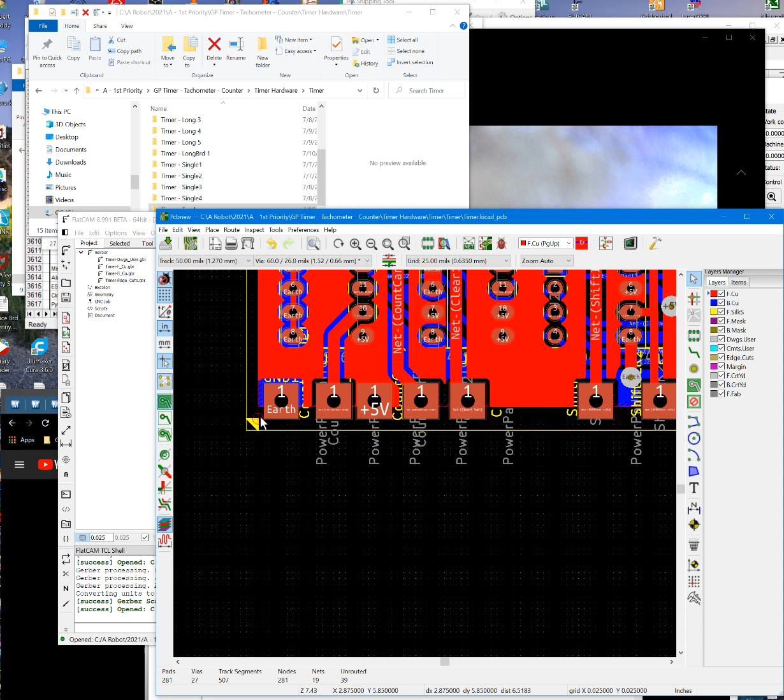So just inset it enough that that's not going to happen. You can also see the border I have around this board — I had to add that too, and this is again 50 mil on each side. I've got my program set to a 25 mil grid, so it's like 2 steps.

So basically, you offset 50 mil on each side, because when you do your leveling, you use one of your copper layers — for example your bottom layer when you're doing the bottom, and your top layer when you're doing the top. But when you press auto, it'll actually go in and grab the copper itself, and it still insists on starting with the home point no matter what. There's nothing you can do about it, so you better inset that. That is a crucial thing to do, to make sure you have a good border around the entire board.

And like I said, this board is like — well, let's see how big it is. Let's see, I got my... go down to the very corner here. Let me just grab this tool so it hooks to it. I'm not going to use the tool, but what I'm going to do is press spacebar, and that resets my DX, DY coordinates here.

So, and again, you could have done that with a wire tool or whatever. I'm just using it as a convenience to get blocks onto the snap grid. But then let's go up to the upper corner here, and you can see, looking at the DX, DY, that it's 5.85 inches tall and 2.875 inches wide. And again, that's something stupid this program does that nobody else does.

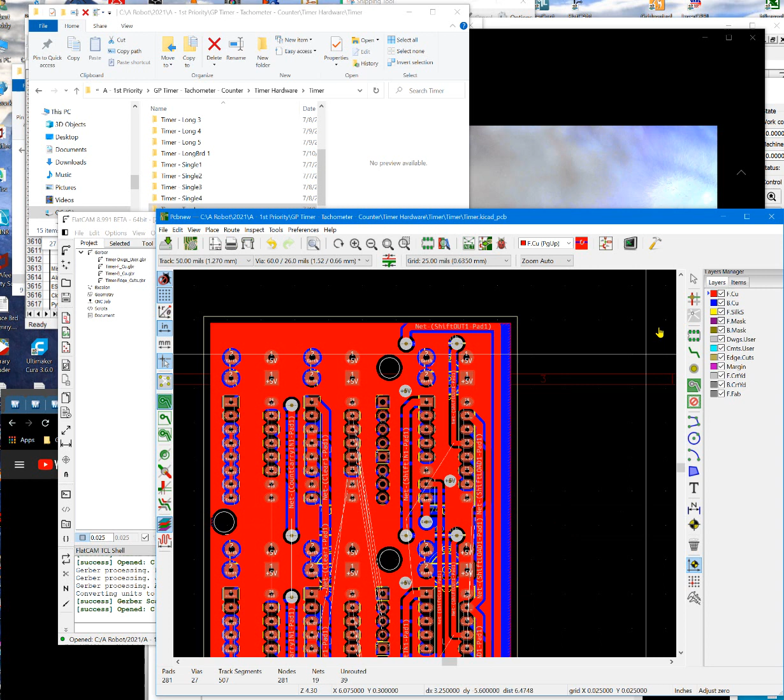This is another thing you're going to want to set: your clearances, your track widths, vias. I usually set my clearance about 20 mil for CNC like this, but to route between pads, like I did on these ICs—again, this is the first time I've ever really tried this, I'm not sure how well this is going to go. But I got traces actually routed between the pads.

That's why I'm going to use a real narrow-tipped V-score router. I normally use like a 45 degree, but I'm going to go down to a 30 degree on this one, just to give myself a little extra tolerance, because the clearance on here is like 5 mil.

That's about the only way, because these traces here are 25 mil. Again, you don't really want to go much lower than that, because a lot of times these V-score routers will tend to overcut, because the deeper you end up going, the wider the kerf is going to be. You can cut through your tracks if the mapping part of it had a brain fart or something while it was doing it. You could end up screwing up a whole board just because one little area's coordinates is all screwed up.

So it's best to give yourself as much leeway as you can. Make these traces as big as you can. Normally, on most of the boards I've done, I don't go any more than 50 mil. And that's what this is.

Ah, damn it, I'm still on that stupid origin thing. But normally, these are like 50 mil traces. Normally I try to stick to that or larger, but when you're doing things like this, you really got to go down to 25 mil.

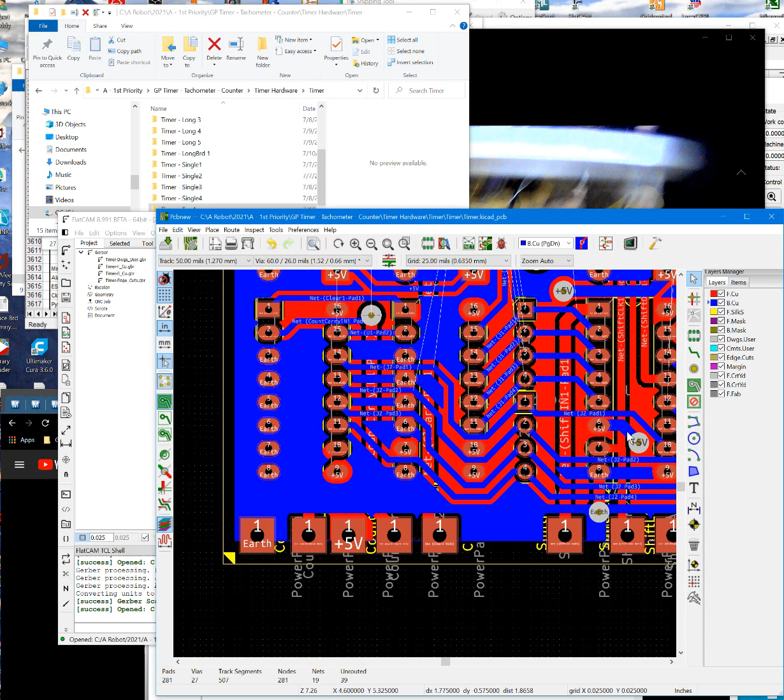The bigger the pads you have, the less likely it is you're going to form a solder bridge. And by the way, on your iron, try to get yourself a real narrow chisel tip. Like, for example, you can see this is way too large of a chisel tip. It's good for heavy duty soldering, stuff like that, but you really want a narrow tip. And again, you can get those on Amazon too for pretty cheap

for different soldering irons. Anyway, I gotta go reset the origin since I accidentally messed up on it. Okay, that's how you set the anchor for the origin, the auxiliary axis that you see here when you push this "use auxiliary axis." That's what I just placed as auxiliary axis. Anyway, you go plot that, and then you can go into generate drill files, and I just leave all this default and just hit generate, right? And it'll generate your files.

Now you should note that when it comes to drilling holes, and I'll explain this when we get to FlatCAM, I really only use one drill bit. The drill bit I typically use is like a 28 mil drill bit. It's like one of these. It's a finer drill bit, but it's good for most IC pins and even 3-terminal regulators that are in a TO. Most TO220 chips will fit into that.

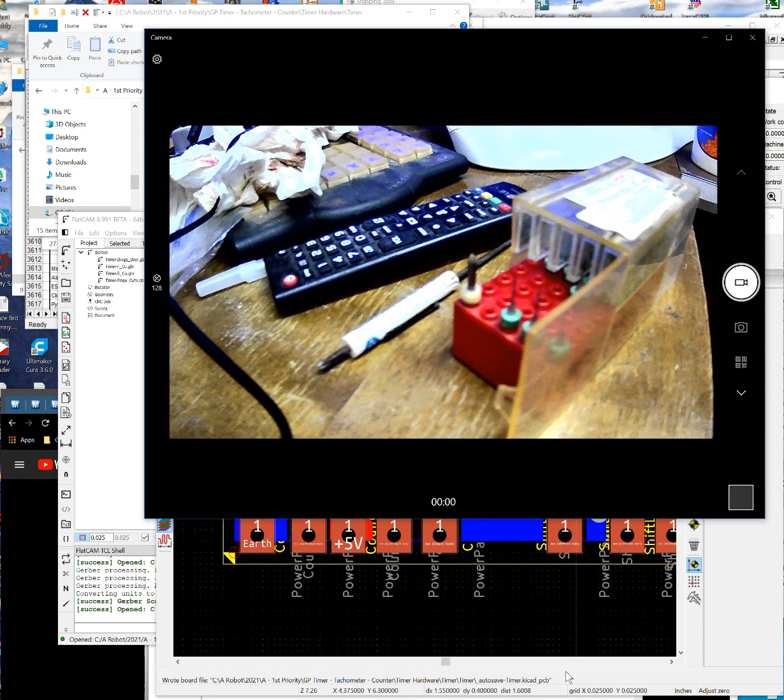Oh, I shouldn't have closed that. Most TO220 chips will fit into that just fine, so it's pretty good for most tasks. Now, if you're using like a 1N4001 rectifier or something like that, you're going to want to go to more like that other size I was using for our little reference holes there.

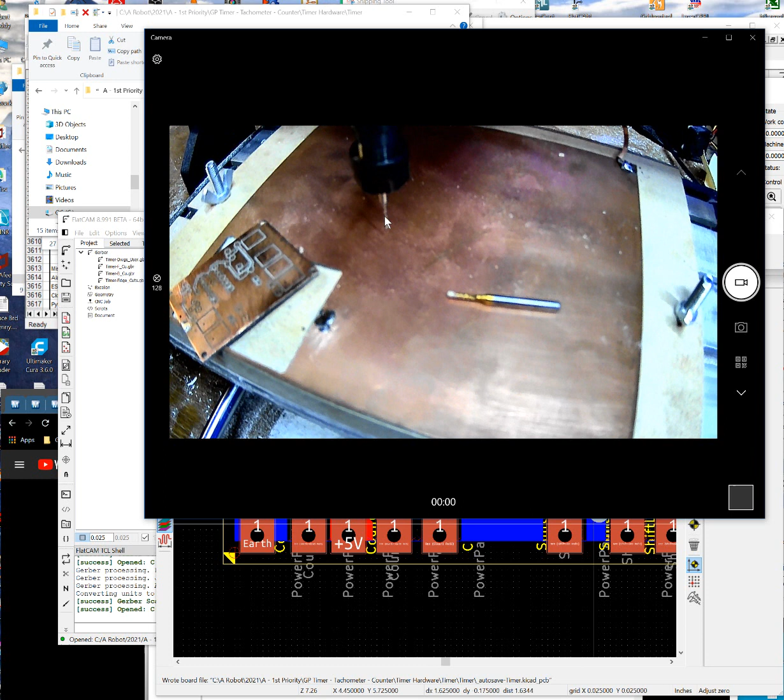That bigger drill bit there, because that's like a 42 mil tip, and that's good enough for most rectifiers. And of course I do have bigger bits too, but I just rarely use them. Usually if a hole's big enough, like some of the mounting holes we're gonna use, I'll just use this router bit. This is a 16th inch router bit. I'll just route the hole out instead of drilling it. That way it just saves you a bunch of tool changes.

Let me go ahead and pull this up. We need to load the Excellon file for this, and coming out of KiCad, it's the PTH file. That brings in our drill holes, right? So you can see how all that's lined up. Going to the Excellon object. Now these are all the drill bit sizes this thing is using. And in order to change this, I would have to go edit the entire library in KiCad.

Now, I could probably make a Python script or something to do it. I'm not that experienced at Python, but it's a simple language. I've gone through training on it, but it's been several years since I really touched it. This is all text files in KiCad. What's kind of nice about it is you can manipulate the files, even the job files, all the libraries, everything's in text files. So it's possible to write a Python script that just changes all this out. But that's such a pain. I usually never mess with drill bit sizes unless it's something special.

But I do have the diode sizes set at a different hole size, so I can single them out. If I wanted to actually generate 2 different drill hole sizes, how I would do it is, let's say this thing here, which is a capacitor. I got 2 capacitors here. One's like a 10 nanofarad capacitor or something like that, and this is like a 1 microfarad, just for noise suppression, because these are high-speed counters. What this board is, by the way, is actually a timer board. Let me pull up the, how I made this was really kind of funky.

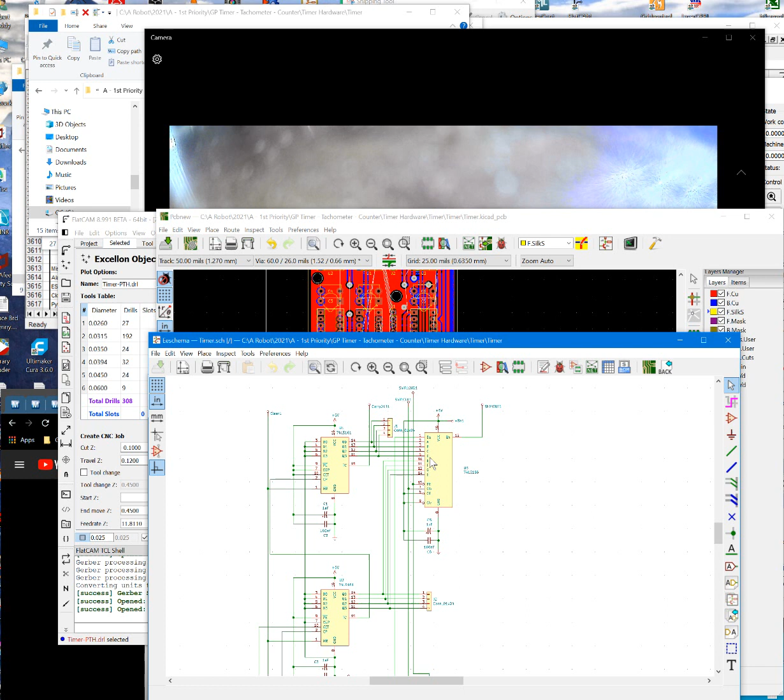This is the actual schematic for it. But this is a series of cascaded sections. These are 74, either HCT or LS or whatever family you want to use, 161 timers, which are rated at 35 megahertz. Okay, and this is a shift register, which is an 8-bit shift register, a 166, LS166. But at any rate, these work in cascaded fashion. So these are 4-bit timers each, but 2 of them together make an 8-bit timer. This is an 8-bit shift register. I'm going to combine 4 sections to make this a 32-bit timer with a 32-bit shift register.

I'm going to hook this up to an Arduino, so that basically I get essentially the ability to either time or count, like 25 megahertz signals, etc., or up to 35 megahertz total. So I can use it as an event counter, which means I can count 4 billion events, in however many hours it takes to do that, or whatever period I want to select with the Arduino.

Or I can actually hook it up to a frequency source, like a 25 megahertz crystal oscillator, okay, and count that and use it as a timer. So I can time real precise events down to, like, for example, 125 millionths of a second. There's just a lot of different applications, I'm not going to go into the applications right now.

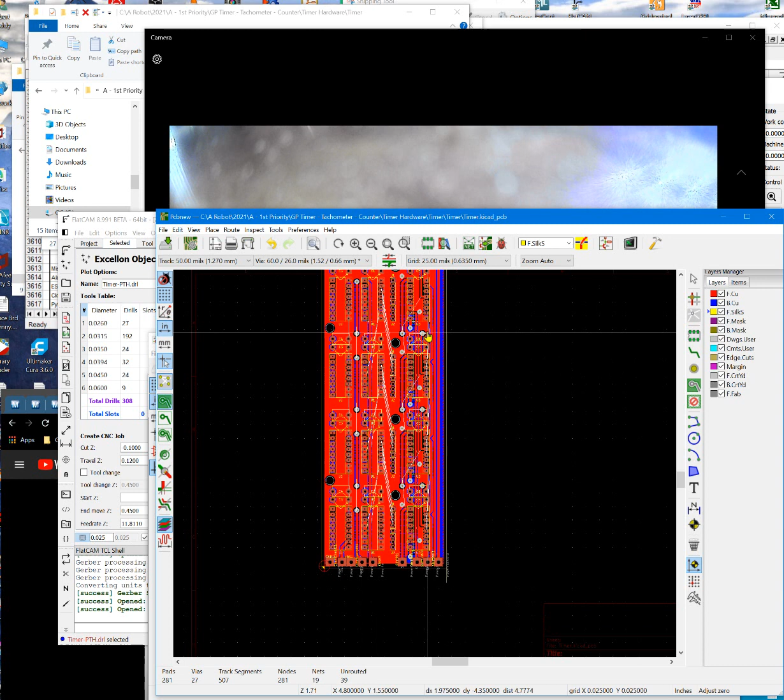But the fact of the matter is, there's 4 of these cascaded together, but instead of just making the schematic huge and having to go in and really position each and every one of these fucking parts in an identical way for the whole thing, I just decided to use the duplicate function, which is like Control D. So I just did the first section here, and then I duplicated it 4 times to make sure everything was lined up. It was a pain in the ass, but then I had to basically reassign some of the pins to a different net, so that I could route them with no problem, since they deviated from the first module.

But anyway, it was a pain in the ass, but it got the job done, and that's why you see a bunch of unrouted nets here, but they're not actually unrouted. It's just that when you do Control D, it kind of copies those nets. Now, if I didn't do the Control D, if I did Control C, cut, copy and paste, it won't copy the nets. So what'll happen is your fill layer will ignore them. So if you want to actually have the fill layer be aware of what net a given pad is attached to, you got to use Control D, even though it creates a bunch of unrouted traces.

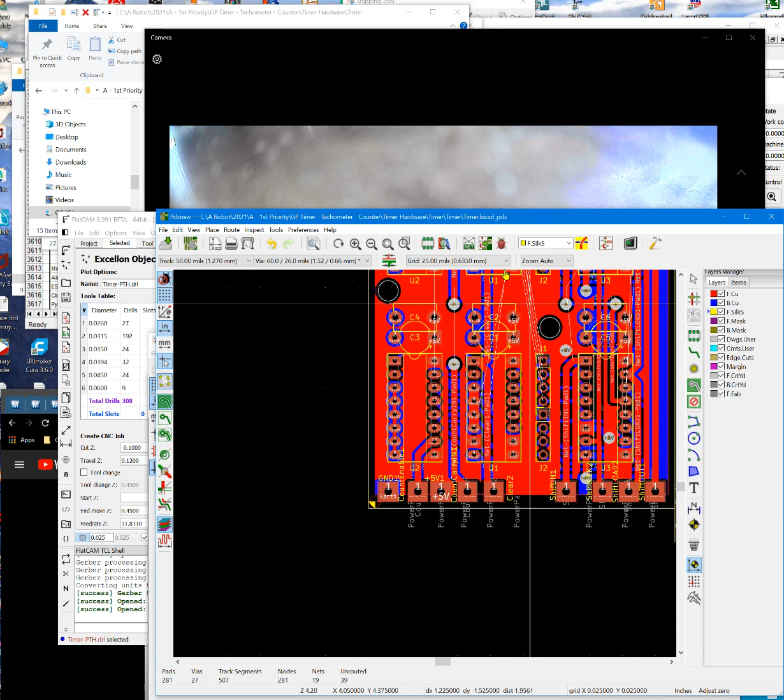Just make sure you get your first one just completely bulletproof. You double, triple check all the connections. Make sure you get all the electrical bridges taken care of, because some of these pads are broken off from each other, etc. So just make sure you get everything together before you start duplicating it. But once you do, it's a little bit of a headache, but it works.

But that's how I created this, by the way. I just didn't feel like going and redundantly trying to route like 500 different nets when really they're just copies of the same damn thing. Now, there may be another way of doing this I haven't discovered yet, but again, it's KiCad, so I don't know. But at any rate, that's how I did that.

But yeah, when it comes to drill bits, like I said, I really only just use one drill bit. And if I were going to do that on this board, let's say like this C4 type capacitor, let's say I wanted that to be a bigger hole size, what I would do is I would come back and just erase everything but these, okay, and then replot the Excellon file, redo the drill file. And then it would just include those components, and I just use that as a separate drilling operation. So if it's a bigger bit, it's not going to hurt if there was a smaller bit that already drilled the hole first.

So, in other words, my first pass, it would drill all these holes, every hole you see here. But then I would load the next file into Flatcam and have that do a trace just for these particular holes for these C4 capacitors. Since it's a bigger bit, the holes are just pre-drilled, and it'll just drill them out a little bigger. So that's how I would do it if I wanted to actually. It's a bit of a pain in the ass.

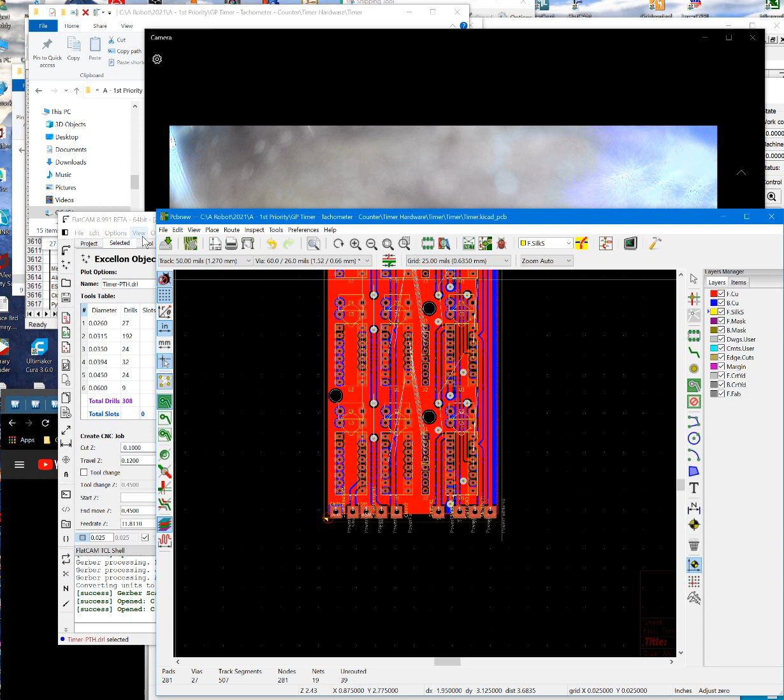The other way you can do it is, again, I've got a shitload of different drills. I could put check tool change. If I did that, that'll make a tool change point in it where the router, the CNC, will go back to its tool change position. Then you got to put a new bit into it. The problem is it would do that for all these times, even though I'm only going to use one bit for all of these. So I sure wouldn't want to do that.

And even if I was just going to change it once, I still would not want to go through a tool change for all of these. It's just a little bit of a pain in the ass. I'd rather just set it up to drill a hole and go watch TV or something while it's doing it instead of having to sit here and nursemaid it. So it's just better to do it that way than to go through a whole tool change thing. In my opinion, but you can do it your own way.

But anyway, I'm getting ahead of myself a little bit. But let's go. Okay, we've got all our stuff loaded in Flatcam. One of the first things I tend to do, just to get it out of the way, is the edge cuts. Now, before I go into this too,

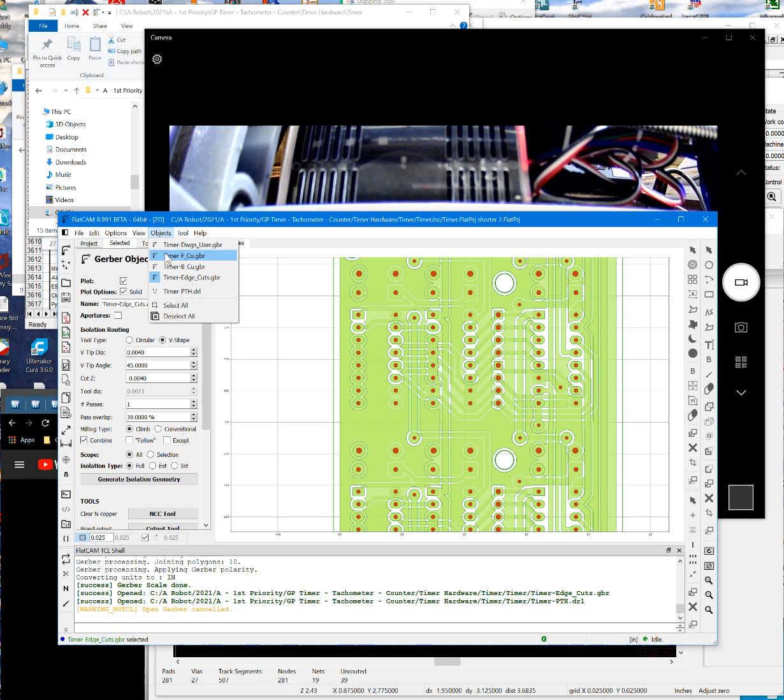I know I left something out I wanted to show you on KiCad. Before I get too far away, I wanted to show you what the different preferences were. You got a preference setting here, which you've already seen. But if you want to find the hotkeys, this is where you set the hotkeys. You can assign any of these items a different hotkey than is set by default. But again, my advice is try to learn it like it's set by default.

And you can press F10 or something like that, and a list of these will show up. But unfortunately, these dipshits made these windows all modal, so I can't go work on something else while these are up. So I can't, for example, bring up the list of hotkeys. Control F1 is where it is. I can't bring this up and just set it on the side because they made the damn window modal. So you can't leave shit up, so it's best to copy those hotkeys to something like,

something like sticky notes, put some stuff like this on it, if you want to. But it's not too difficult to get used to these hotkeys. Once you get used to it, this program's actually fairly efficient. Again, I really ought to make a separate video on how to use KiCad, but it would be rather lengthy. But it actually is a pretty efficient program. I wouldn't use it if it were too big of a pain in the ass. I can't stand things being too big of a pain in the ass. And there are some pain in the ass aspects to this, but

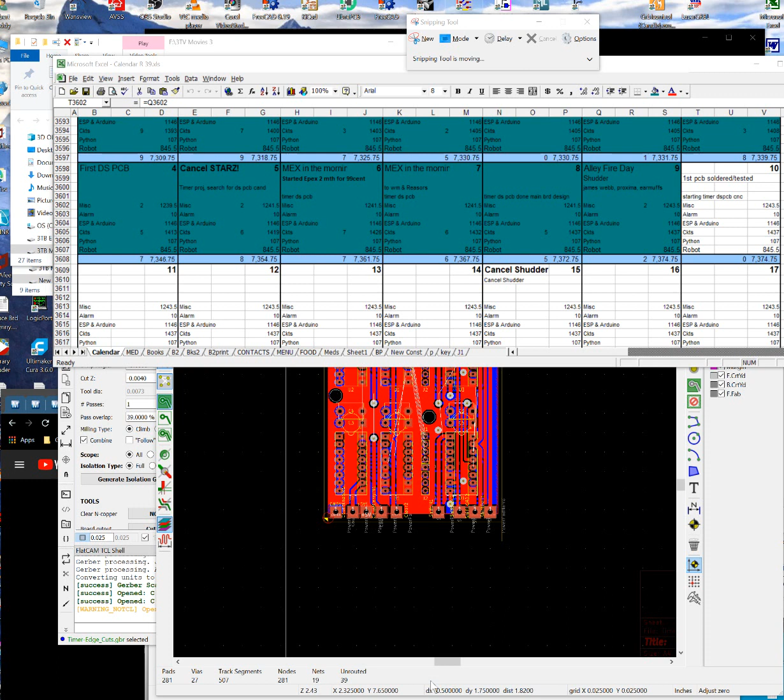This is Circuit Maker 2000, if that tells you anything. It was made by Protel, aka Altium. It was a low-end product back then. In fact, I bought this program from Jameco for like $600. But yeah, it's a decent program. It's got a few bugs in it, but the problem is its libraries are also out of date. Nobody does anything with it anymore, but it still works. You can still generate Gerbers for Flatcam or whatever. So I still do use it from time to time. I'm just trying to update to something a little more modern, that's still simple and free.

That's where the hotkey settings are. There's one other little area that has settings: interactive router settings. So in your circuit board part, that's where the three settings areas are essentially.

I've used shove auto routing, because KiCad doesn't auto route, by the way. It does not have a built-in auto router, but its manual router is still quite good for net routing. They do have an auto router available, but it's a separate program made by a different open source supplier designed to work with KiCad. I haven't tried it yet, but I guess it's pretty good. At any rate, that's enough about KiCad.

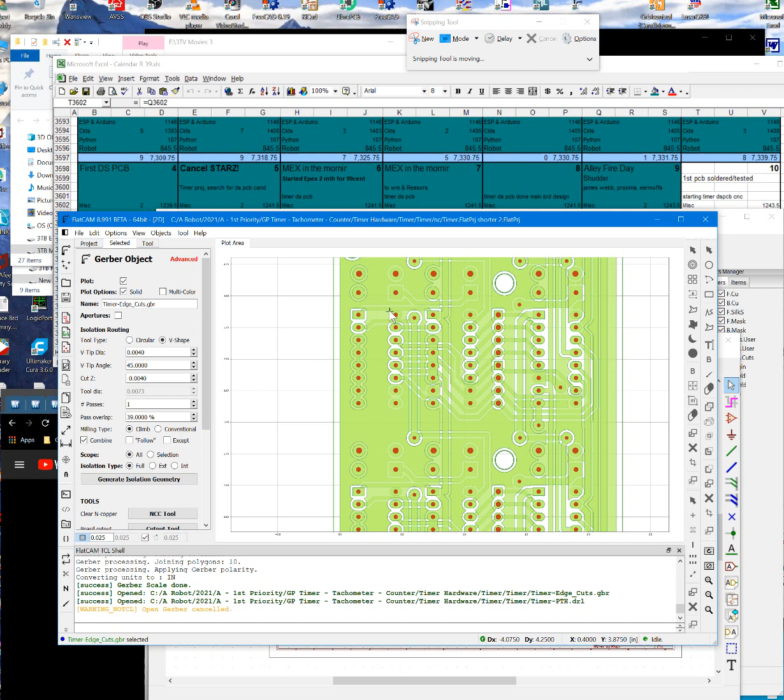Like I said, this video is going to be long, and it's a single cut. I do have Corel VideoStudio, which works great, but frankly I made several hundred videos for YouTube, and I wouldn't have if I had to go through the whole process of cutting them together, splicing, compiling, and doing cut scenes and all that. It just takes too much time. So I always try to make videos these days as single cut videos as much as possible. That's what I'm doing here.

Right now I'm using Corel VideoStudio's little Screen Capture program, which is a nice little program. It makes really small video files, that's what I like about it. But it's part of that Corel VideoStudio package. You can resize the screen to whatever you want pretty easily, and it's an efficient way of doing it.

We're going to start working on this edge cuts layer, which is this outer layer here. By the way, you can go in here and hit Shift Select to disable a lot of plots. It makes this stuff disappear. It's still there if they're just disabled, so it doesn't plot them. You can see we still got the edge cuts layer and the Excellon thing up.

Then you re-enable them, and since we're doing a double-sided board, I'll usually just set the color. But I don't like it being too extreme because your holes will disappear. So instead of making it red and blue, I'll go like this. This is the top side, so I'll make my top side like a salmon color, just so it's not too extreme.

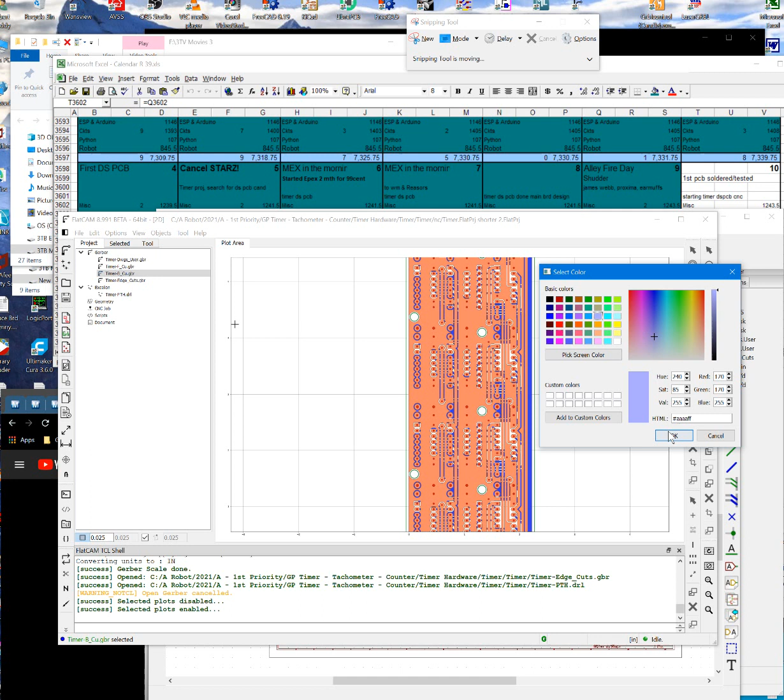It's a bit of a pain in the ass, so I wonder if you could set the defaults on this, I'm not sure when it comes to colors. But I'll do salmon for the top layer, and I'll do a lightish blue for the bottom layer, something like this. This makes it a little easier to see. Those are about the first things I'll do.

Then I go back to the edge cuts layer, and I'll take care of that first. Oh yeah, these are the defaults, the preferences. The preferences settings are extensive on this. They're under the edit menu, but you can set all kinds of things. These are all different tabs: general, Gerber, Excellon, geometry, CNC, tools, utilities, etc. Several of these things I've set the defaults on, because by default this Flatcam thing is in millimeters, which if you're a millimeter person, you probably like that.

You've got to scroll down and make sure you don't forget these scroll bars are here, because like I said, there are a lot of settings on this thing, and I'll commend them for that. It's good they made this comprehensive.

Unlike KiCad, which honestly really lacks a lot when it comes to settings and preferences. I wish KiCad was more like this. Even trying to find some kind of file where all the real nuts and bolts settings are, I still haven't been able to find it yet, either in the registry or in some kind of file, so I have no idea where you modify really basic stuff, except for creating a template job in the main directory.

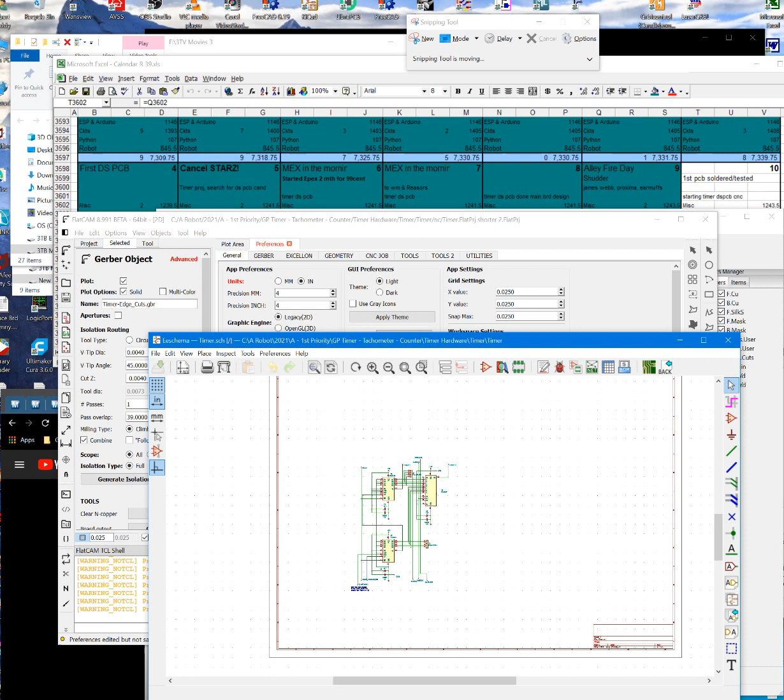In a template job, if you press open existing project, you go new, create project from template. This is a template job, and here are a couple of templates I've created, which have all the default settings, but you've got to go edit these template files in the root directory. So it means you can't create them on the fly because you need permissions, and this thing doesn't work with permissions in Windows. Even if you open it up as administrator, it doesn't matter.

So anyway, they go out of the way to make it such a pain in the ass, it's unbelievable, just simple little things. That shows you the difference between professional software and amateur written software, because amateurs don't take the time to do the boring stuff that makes a program really usable. Just little things that tend to be really aggravating.

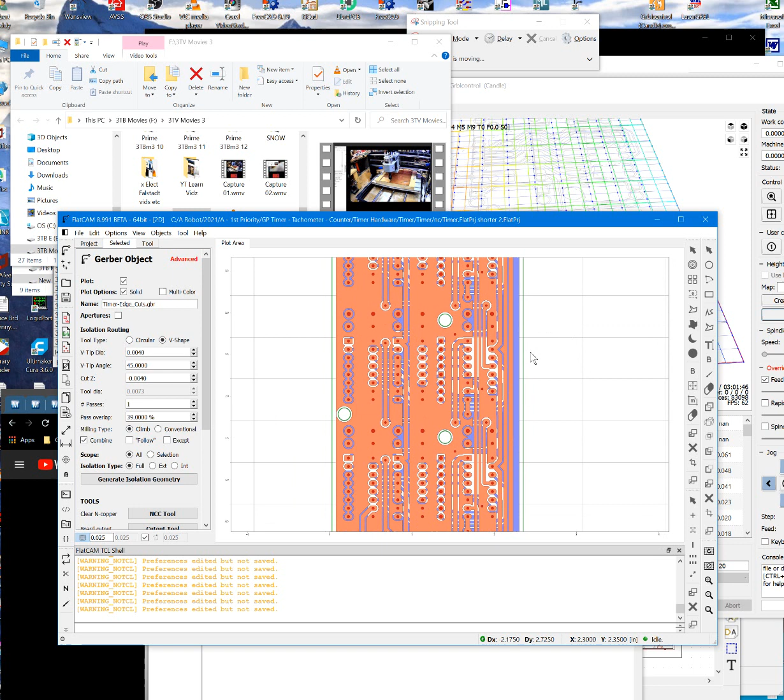On this program, the right mouse button is what you use to pan your view, whereas it's the middle mouse button on KiCad, so I don't know if there's any way of changing that. You can use the mouse wheel to zoom in and out, but I keep trying to use the middle mouse button to pan, so that's annoying.

But anyway, let's get back to doing our first layer, which is this edge cuts layer. What I'll do is use the cutout tool instead. You can just use the edge layer, but I've already got this. You can route it like a standard object, like it was starting to do, but when you're doing this, this cutout tool is kind of nice because you can put gaps around it.

If you don't know what that means, I got the gap size set to 20, and I've got it set to top and bottom, but you can actually have it left to right, or on four sides, or two on the left, two on the top, things like that. I wish they had a damn preview button in this program, this Flatcam. Maybe the newer version has one, but they really need a preview button.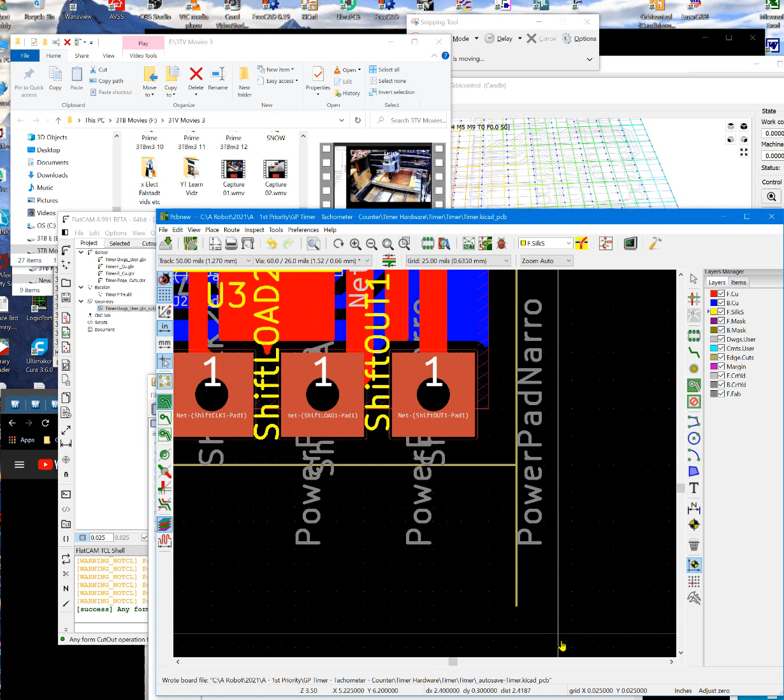At any rate, you hit generate rectangular geometry, for example, and... shit. Oh, god damn it, well I guess I've got to go regenerate all those damn files again. Apparently I forgot to change this stupid program. It's one of the other things it does that I don't like. Even if you draw it with this graphic polygon tool, it still treats this like a bunch of separate line segments. Shit, I changed the fucking reference again.

There's no way of changing the goddamn color of this thing, so make sure it's not set to something it shouldn't be set on when you're doing stuff. Like I said, I can barely see that. I wish I could make it bright orange or something, but I haven't been able to find a place to do that. Yeah, this is the way you've got to resize the thing - it's usually better to just draw the whole polygon over again.

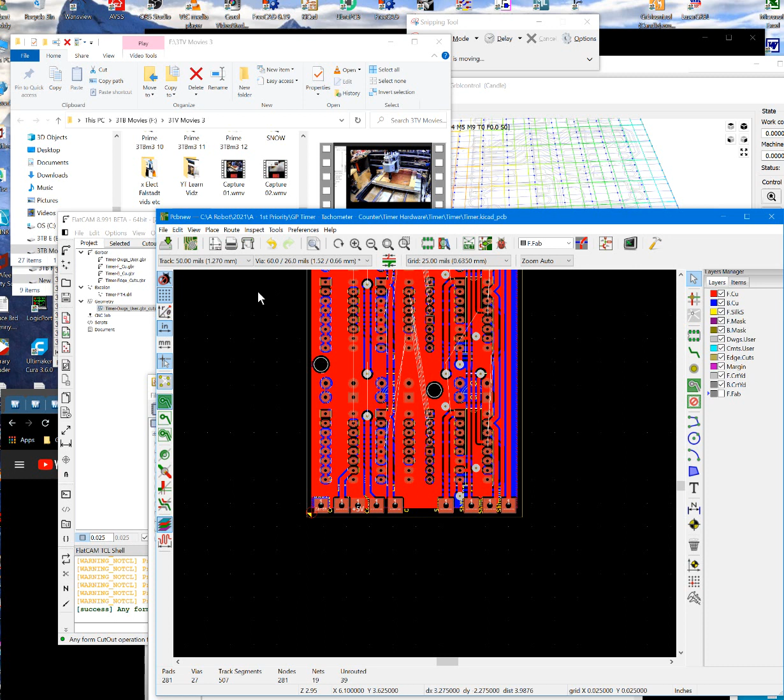So let me go ahead and generate it, I don't think it'll affect anything. I'll just do it all over again, go back to Flatcam, take this, press delete, and open that again, edge cuts. Okay, now that's gone. That's why I was having trouble, but at any rate, you could do it as a typical Gerber object, or you can use the cutout tool.

It says edge cuts there, okay, but if you go to the cutout tool, sometimes it grabs the wrong layer. So you gotta make sure you grab the right layer.

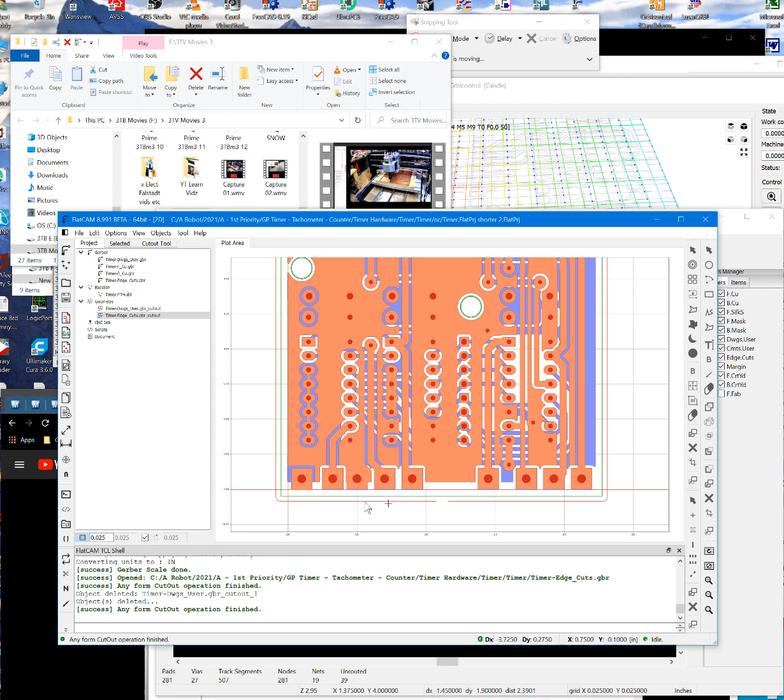Now, generate rectangular geometry. These right here are what those tabs are, so basically this is the routing path - it'll route everywhere except for this tab on the bottom and on the top. You can change the width of that tab, put two on each side, or do custom tabs, etc.

If you didn't have tape under your board while routing through it, and you don't keep control of it, you can end up breaking your router bit, destroying your board, a lot of stuff, because once this thing finally cuts loose, your router's still running, particularly if it's routing yet another pass deeper than it's supposed to, because you set it like 100 mil when you're depth, when you're only doing a 60 mil depth board, but you're trying to make sure it positively routes it.

If this board breaks loose, it can get in the way of your router, and your router can start cutting holes in it. It can cause the board to go flying across the room if it's a small board, etc. But since we're taping our board down, we don't have to worry about that here.

So in this situation, I'll go to the cutout tool, and I will not put tabs in it at all, because I don't need them - because it's taped to the substrate there, to your backing board.

Now here, I'm going to do something a little different. Again, these are the settings I typically use, although I've got to change this into defaults, because these days I'm only going 80 mil instead of 100 mil depth.

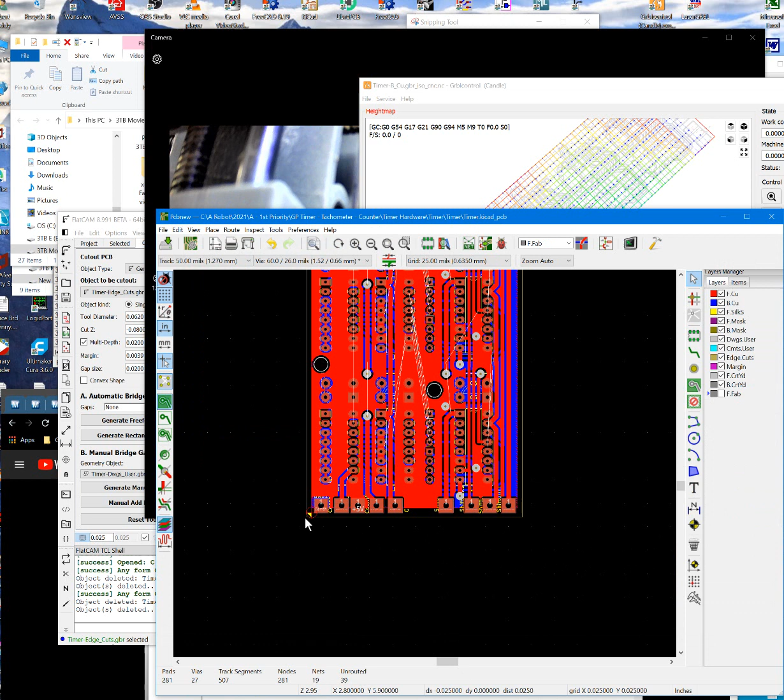But the other problem I ran into, like I said before, with that first double-sided board I showed you that I did, is I put the home point in the wrong place. I put it, like I said, in the actual corner of the circuit board instead of inset like this.

So I had a bitch of a time when I got to doing the top side of the board, because it was trying to height map it and walk off the edge of the board. This home point, I'd already routed the board, obviously—that's how I flipped it, right? But the problem is that this point actually was in midair at that point, because the router bit had over-routed slightly.

That's why you inset your corner a little bit, so you don't have to worry about that. On a single-sided board it's not a problem, because you don't height map it twice, but you got to height map it for the bottom layer, and then again for the top layer later on, so you got to make sure you've got copper underneath this thing, or your bit will crash. Because it won't think it's running into any metal, so it'll just keep going and going, and it could break your tool, or cause your stepper motors to miss a step or something like that. It's not a good idea.

But at any rate, that's one of the other reasons. As an extra precaution, instead of using 62 mil, which is my actual router size, I'm going to make this 100 mil, so that I get a little bit of extra depth. Let me show you what that'll do.

Again, we're not going to use this. Our Z depth is going to be 80 mil negative—that means below its supposed surface. And then our 20 mil per step routing. You can do freeform geometry if you had some kind of odd-shaped board.

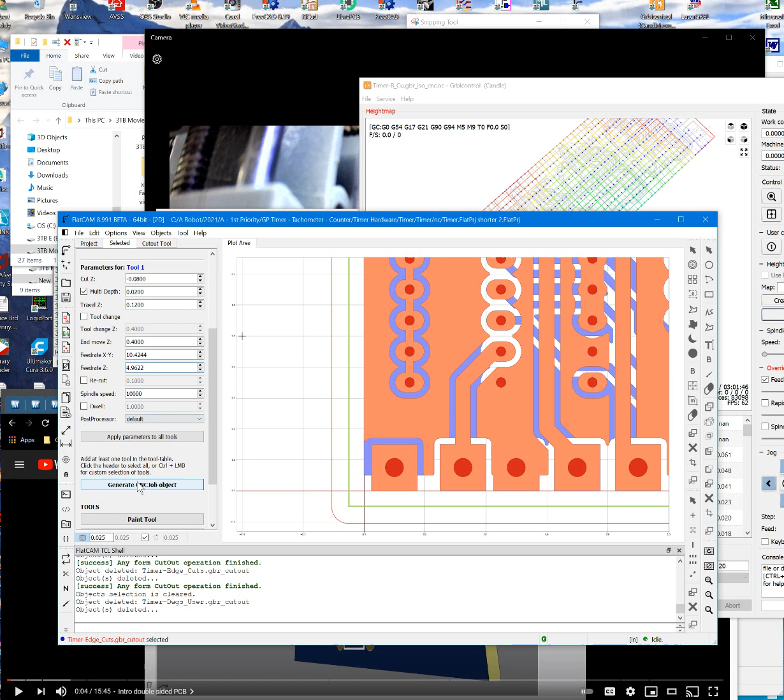So then we go generate CNC job. Alright, and so that's generated our path. It thinks we're dealing with a 100 mil width tool, and that's the path it will follow.

This yellow line is its starting point. So it starts here, then goes here, and starts doing its job basically. But at any rate, it's generated a CNC deal.

You can either view the CNC file if you want, and this is the actual G code it generates. G code is really pretty simple once you get used to it, but it's still a pain in the ass. I'm still looking to see if I can find a graphical G code editor so I can select a path and have it highlight in code so I can cut it out or copy it. I've still not come across a program like that. I'd be pissed off if I had to write one myself in C# or something.

But at any rate, you can view the G code if you want, and you can edit it I think. Find in code, print preview - oh, that kind of print preview. So okay, I guess you can print it out on a printer. I was thinking maybe that was a 3D plot of it, but I guess not.

Let me close this, you can just leave it up and go back to the plot area. These are tabs up here. Let me hit save CNC code, and these are previous ones that I made.

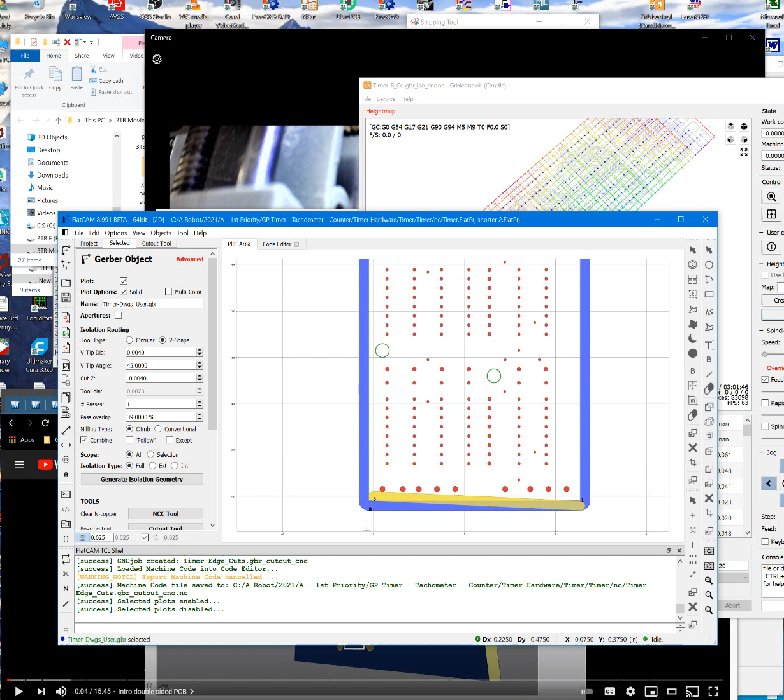The way I'm going to show you is the best way: you're just dealing with a different Gerber layer, in this case the drawings layer, like I said, on KiCad. You can, on KiCad, you can have...

God, I hate - I hate YouTube, and I hate it doing that crap. I'm not going to go into it, not going to go on a rant. Anyway, just wanted to close that piece of shit. Sorry, I'm like borderline autistic, so it's hard for me to do this kind of shit, and stuff like that bugs the hell out of me.

Let's see, I forgot what I was talking about now.

Oh yeah, in KiCad, like I said, you can have all these different layers, and there's actually more layers if you can figure out where the hell it was. It wasn't settings, preferences - that's what they call it. No, it's not. These fucking morons - a consistent way of doing things would be nice.

Yes, I don't think it's here. Maybe it is, I don't think it is. Oh yeah, it is, okay. Yeah, see, this is a layers deal, so you can go and set the different layers you want to have. I don't know if you can add a layer to it or not, but this is where you set some of the layers. And like I said, you can have these different layers you can draw on.

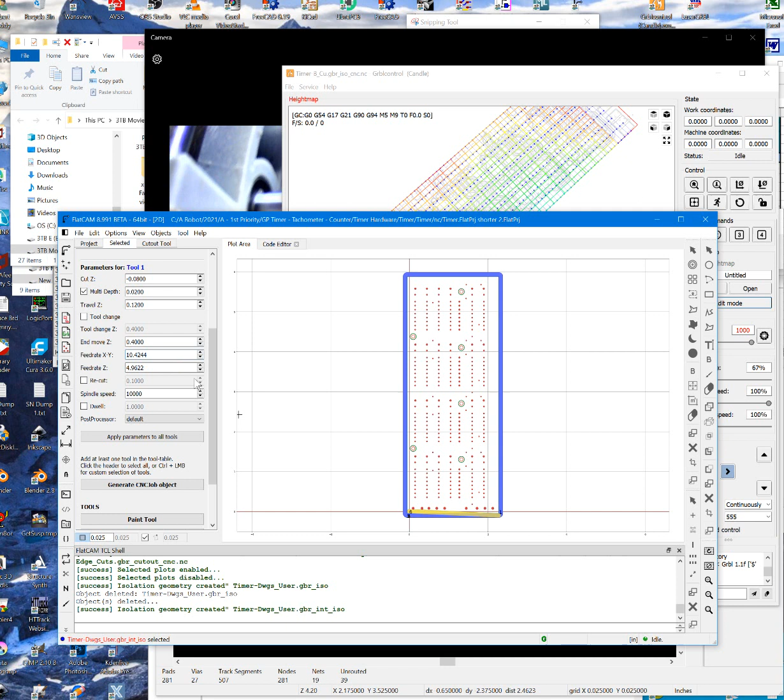But that's why this is a little tricky, because you've got to pay attention to some of these windows, which you might already have set up to defaults, but those defaults don't apply because I'm trying to route through the entire board instead of route trace. So at any rate, those are the main things you got to pay attention to, this and this. Okay, when you're trying to route a hole, and this is its travel Z, so it means when the bit is not routing something, it'll travel 120 mil, or about 1/8 of an inch above the board. But you can set that to something else.

It's just that, on these 3018s, especially with such a thick base, I don't have a whole hell of a lot of Z depth available. And as it stands, it used to have almost 500 mil. It would come really close to crashing it into the top, especially when I had the expanded PVC under this and everything else. So anyway, I try to set it as low as possible, but within reason, to where it's not going to crash into some irregularity in the board or something. So at any rate,

we got that all set, so it's time to generate our CNC job. Okay, so when we do that, that brings us into this screen, which, by the way, happens to be down here, along with the other job we generated. Okay, and basically, that's all done. If you wanted to look at the G code, you can. It's a lot simpler with the G code, because it's just a few pathways.

Actually, it's surprisingly complicated. Wait, is that the... Anyway, it's surprisingly complicated. I don't know why they do it that way. That is surprisingly complicated, because these are just, oh yeah, it's circles, because we were routing around circles, I forgot. I thought it was just drilling holes. Again, borderline autistic, can't help it.

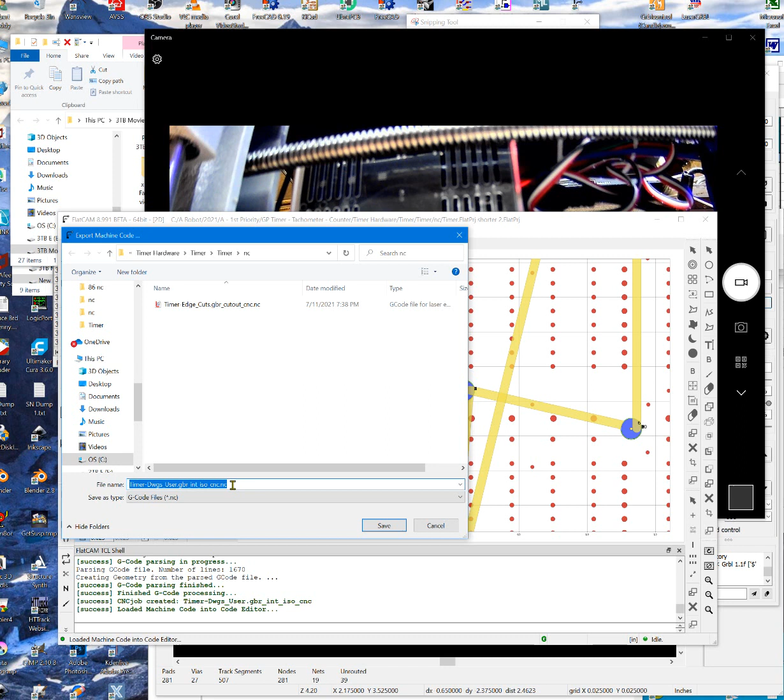Anyway, let me hit the save CNC code. Okay, so that saves it. ISO CNC, you could call it anything you want, but they kind of stand out, so I just kind of leave it as default. Okay, so that's got those two things taken care of. And that's fine to have done those, because I've actually got ahead of myself. This usually isn't the first step I do, but it's okay, because these apply, well, actually they don't apply universally.

God damn it. Yeah, I've actually got to go delete that. That damn beeper is driving me nuts. I'm going to turn that off. Okay, anyway, that's one of the bad things about uncut videos, is that you get all the mistakes too.

Okay, I messed up. On this, let me go ahead and take that, and delete it. Because actually it should have been on the bottom side. Again, it's not a problem for the edge cuts, because it's the same no matter what. But the first thing we ought to do, given the fact this is a double-sided board, and it's okay to have done our edge routes, but we should go up to tools and do the double-sided board tool.

Alright, now what we're going to do is I'm going to put reference holes on this. And you don't have to use this double-sided tool. You could have theoretically done this yourself, but it'd be a lot more convoluted. I just prefer to do it here. Notice, X and Y and so forth are red down here.

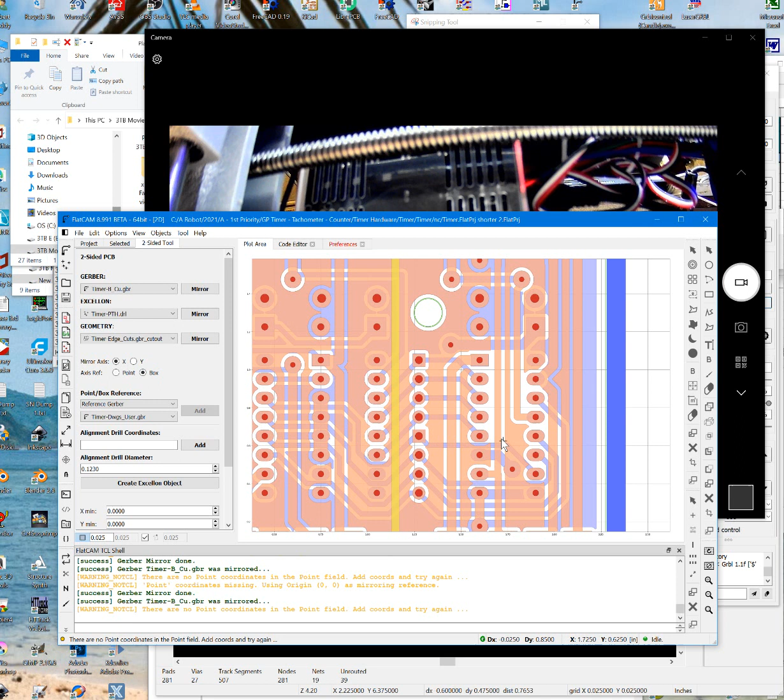Okay, the drill holes look like they're in the right place. We got our two layers here. I was wondering where the layers were disappearing to. Okay, so now the bottom layer we want to mirror, but within that bounding box. Okay, it's vanished again. The layer's definitely gone. So, reference Gerber, this isn't what we want to use, I know that. I don't know if that applies to this or not. You wouldn't think that it would.

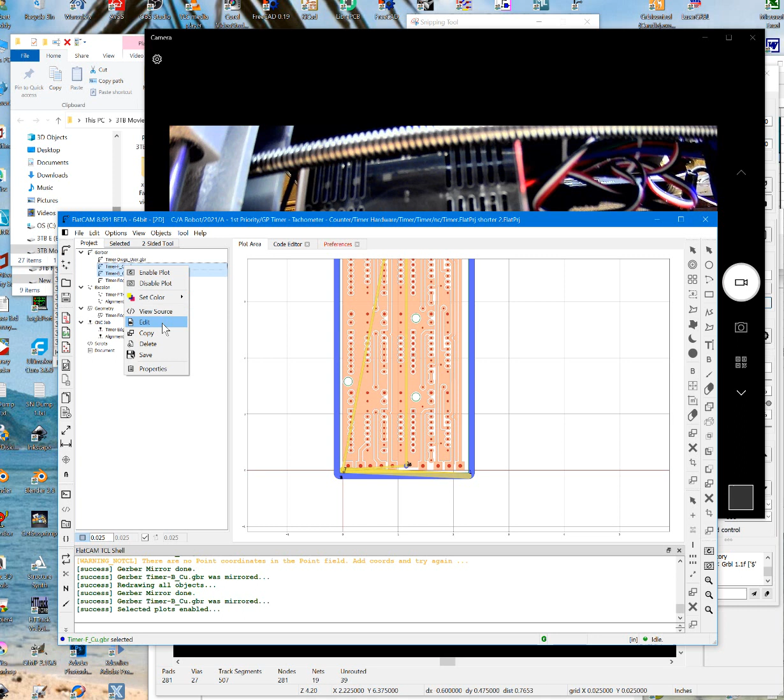For fuck's sake. I don't know what's going on here. Is this not enabled or something? I don't know what the hell. God damn it. I'm about to just scrap this and start from scratch because I don't know what this dumbass program is doing. I do not have a clue. And what happened to the layer? What is this piece of crap doing?

And just to be sure, I'm going to delete this too. Alright. Reload this. Here, I'm going to reload these two. Okay, see, these holes are down here now. Alright, so I'm going to have to get rid of that thing too. Yeah, these people could have thought this thing out a little better. This is, anyway. Son of a bitch.

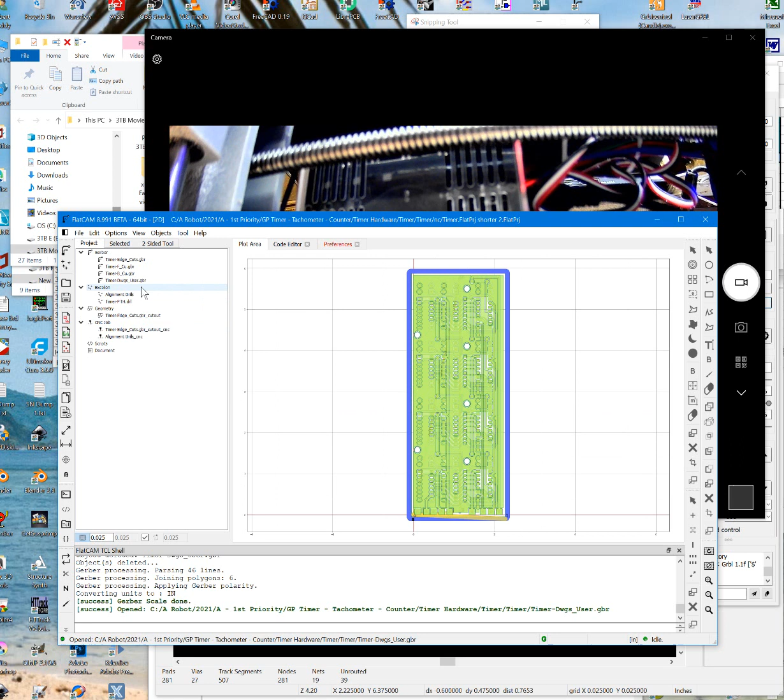That reached the limit of my frustration. Shit can this whole video thing. This is just confusing the shit out of you guys. God. Okay, let's try this thing again, shall we? You know, in many ways, this isn't even worth using. Anyway, we've already generated our reference holes. I think they're still there, aren't they? I have no idea.

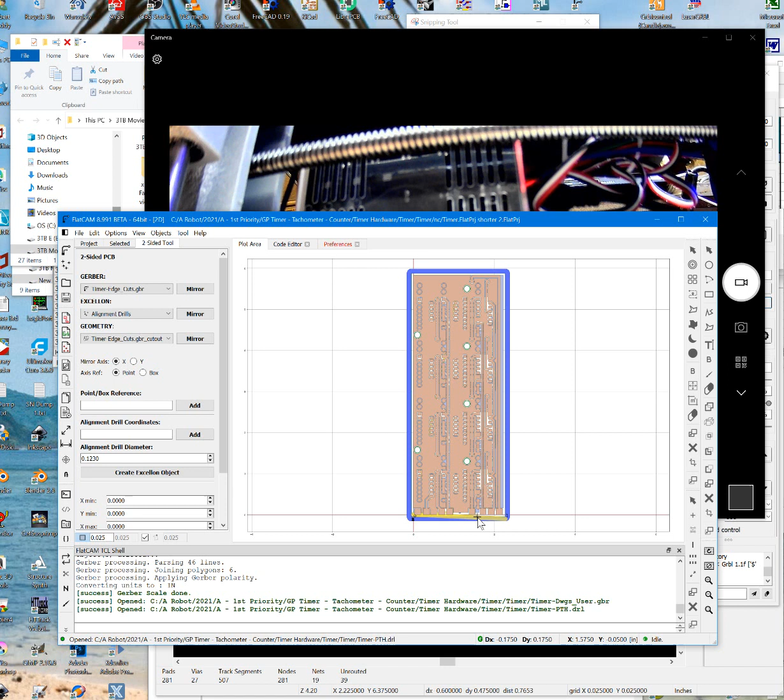Let me bring the Excellon thing back in too. Okay, I don't know what this thing is doing. I'm starting to think that maybe because I'm recording this or something, it's interfering with this piece of shit. I don't know what the hell's going on. It's like this thing's gone haywire or something. Nothing seems to be working right. What is this? I have no idea what this is doing.